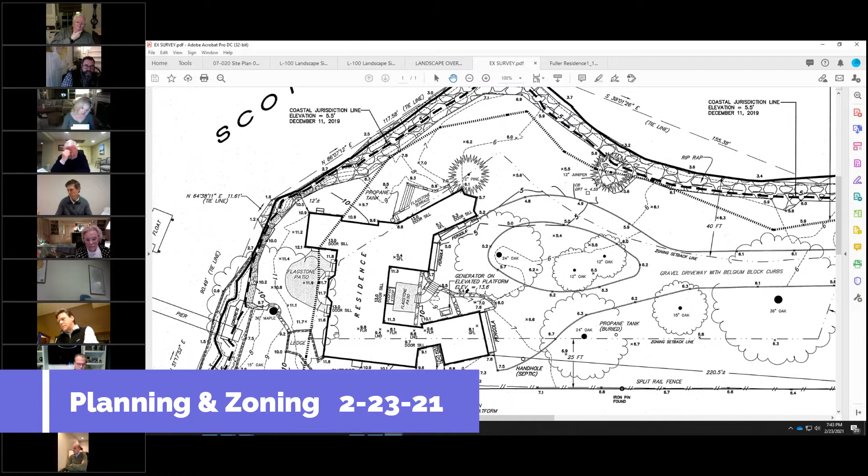Also, that sunroom that we talked about earlier is just 10.5 feet from what's defined as the rear yard, which should be a 40-foot setback. And that's where the property abuts Scott's Cove. Our lot is very attractive and bounded by Scott's Cove to the west and north. And because there's a little bulge, we actually feel like we do have some easterly views over Scott's Cove back toward Contentment Island Road.

The lower garages, which Danilo can point to in this plan, right there, right opposite the oval, flood frequently, and we'll show you some pictures of the flooding later on in the presentation. One of those garages was installed when the house was built. Another one was put adjacent to it in 1997 when there was a kitchen addition. The house was built in '54, and they actually graded the site down lower into that garage, and they built retaining walls up to get to the front door.

Danilo will point to them, but you can see several sets of steps which take a person from the driveway at elevation 5.5 all the way up to the house at elevation 13 over this front flagstone patio. We've actually lost two cars in those lower garages, and I no longer keep any cars there. The elevation of that garage floor is 5.4, and at Hurricane Sandy, as you all may remember, the elevation of the floodwaters was roughly elevation 11.

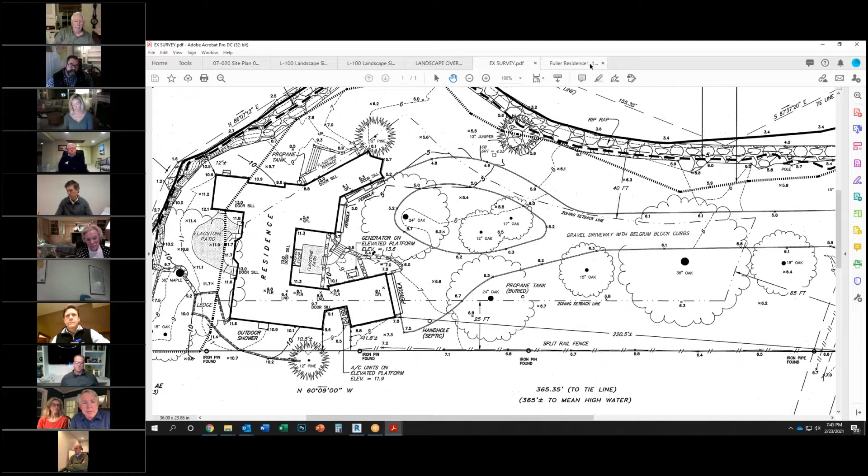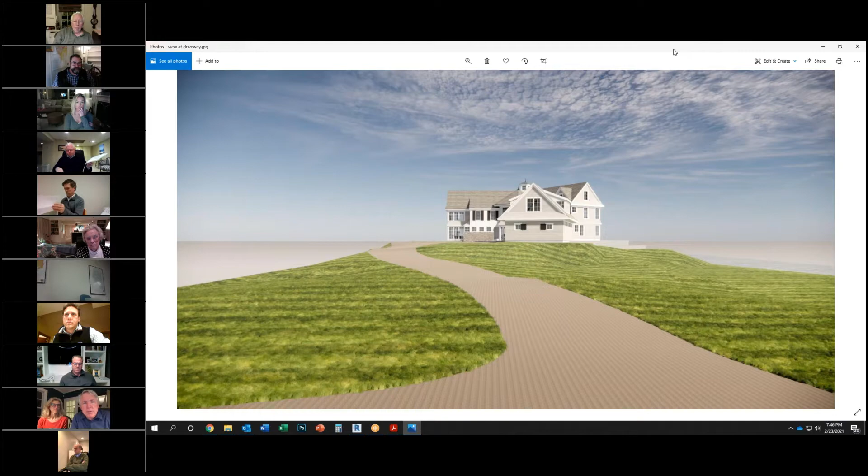While Danilo is looking, there it is. There, that's the view of the proposed house from Contentment Island Road. Danilo, do you have the one with the front door looking from the southeast toward the front door, showing the garages and everything? It's more representative of what the house looks like. That one right there. That's what the new house will look like.

Although this looks certainly more dramatic than our current house, this house is only 1 room deep. It's 20 feet deep. We've designed the house so that every room in the house has a water view and takes advantage of the water views. The house is 2 stories along the water to the west and to the north, and then there's an L that has the garage, which is only 1 story with the playroom over the garage that's built into the roof of the garage with dormers. So bringing the element down closer to the road, bringing a lower element into view.

The footprint of the new house, Danilo, do you mind showing the footprint of the new house versus the old house in that site plan, which shows the blueprint? So in blue here, if you could zoom in there, you can see in the blue is the footprint of the old house, and in red is the footprint of the new house. And interestingly, you can see we had to move the new house north and east in order to conform with the setbacks and in order to get out of the velocity zone, which was an important part of this design.

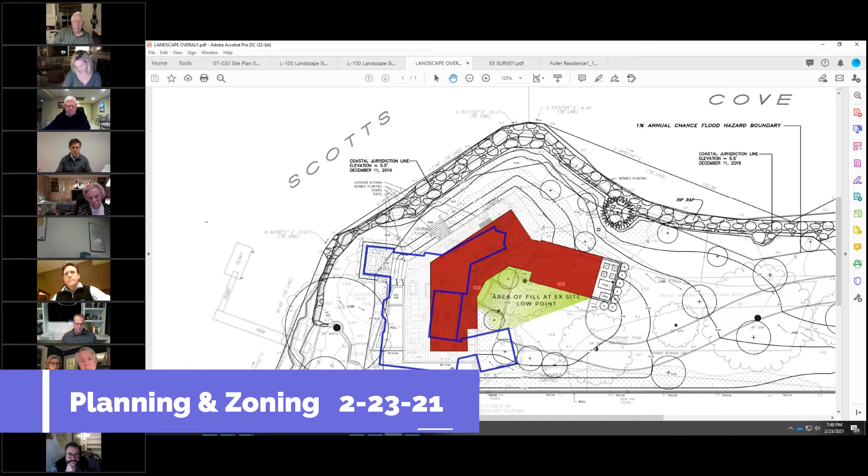The new plan will conform with the building height requirements. The height of that new home will be 27 feet above grade, and the regulation has a maximum of 30 feet. Just to give you a feel for the kind of conventional design of the house, it is designed as a sort of a beachy shingly house. There are only 9-foot ceilings on the first floor and 8.5-foot ceilings on the second floor, and a relatively conventional 12-12 pitch roof. And again, it's 27 feet tall versus the allowable 30.

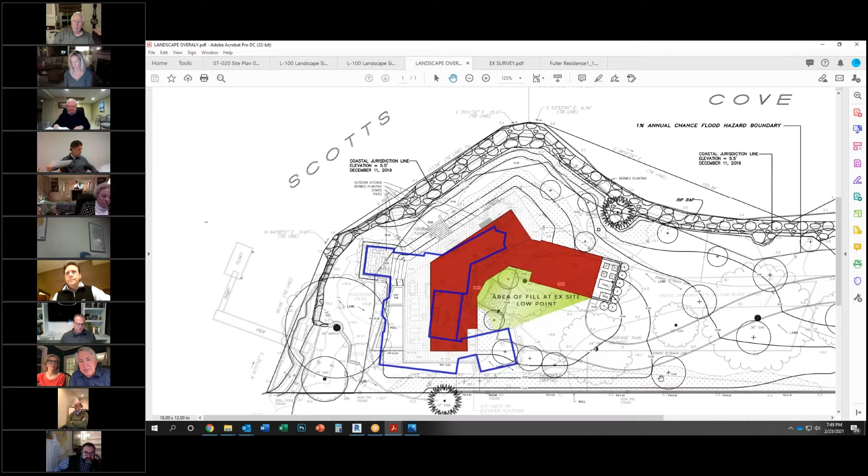All of the mechanical, HVAC, generator, pool equipment, and everything will be above the flood elevation. The house will be designed as a slab on grade, so that there will be no risk of flooding of a crawl space. No basement is allowed in the flood zone. And so we just won't have to worry about that anymore. And we bring the driveway up very gently at only 4 feet for every 100 feet of run. So that's a 4% grade change, which is very, very low. We bring the driveway up to elevation 15. So cars that happen to be parked outside the garage for visitors will be up above the flood elevation as well.

So I have another site plan. We'll show you some other photographs of what this site plan will look like later on in the presentation. The proposal is to fill the existing grade to raise the house above the flood elevation. As I said, the driveway slopes up just 4 feet for every 100 feet of run. The house is set back about 220 feet from the road, and we're rising up from elevation 6 to elevation 15.

The amount of fill is 5,400 yards. I know that sounds like a lot. It's not really. At 15 yards a truck, it's about 360 trips, or at 32 trucks a day, because we'll probably have a number of trucks running, that will be done in 12 business days. We would run the trucks for the fill during regular business hours, during the week when people are less likely to be home. We will, of course, have tracking pads, dust control, and street sweeping to the extent any debris does come off of trucks or any dust comes off of trucks.

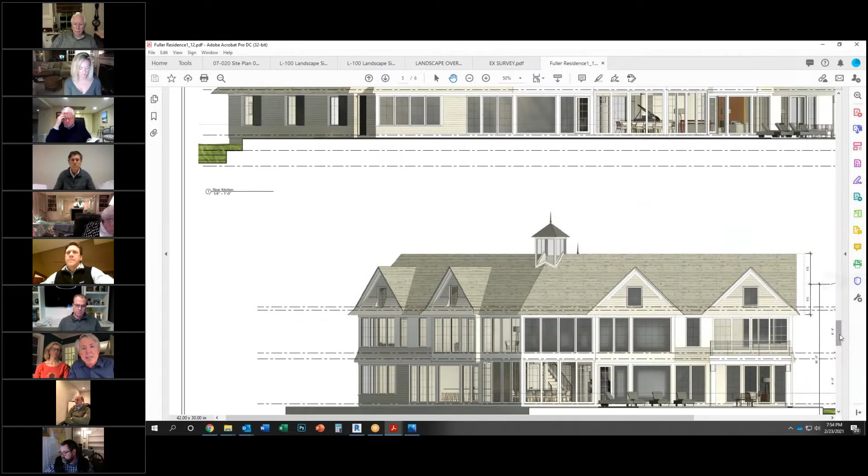So absent having a flat roof, and we can see this in section. If you zoom in on the part to the left, Danilo will show you this. You zoom right in, Danilo, so people can see the numbers there. If you look, the lower garage slab is at elevation 5.3. The existing average grade is 7'8".

What we're proposing is that the average grade be considered at 10, because we are going to fill in this area that was excavated for these lower garages, and we'll show where that is in the plan view. So that's roughly 2 feet 4 inches of fill. That makes the house conforming. As you can see, it's a relatively conventional house. And because the floodplain, which is AE 13, requires construction at elevation 14, we need to have a higher average grade.

And theoretically, we could have gone to the Zoning Board of Appeals and taken this decision out of the Planning and Zoning Commission's hands and said, look, because we're in this floodplain and we are required to fill so much to get out of the floodplain, would you allow us a variance because of this situation unique to this lot, on the definition of the height above existing grade? And since a subsequent decision by the Planning and Zoning Commission to allow the grading would render that decision unnecessary and moot, what we're proposing is that we consider this as if it was 2 phases.

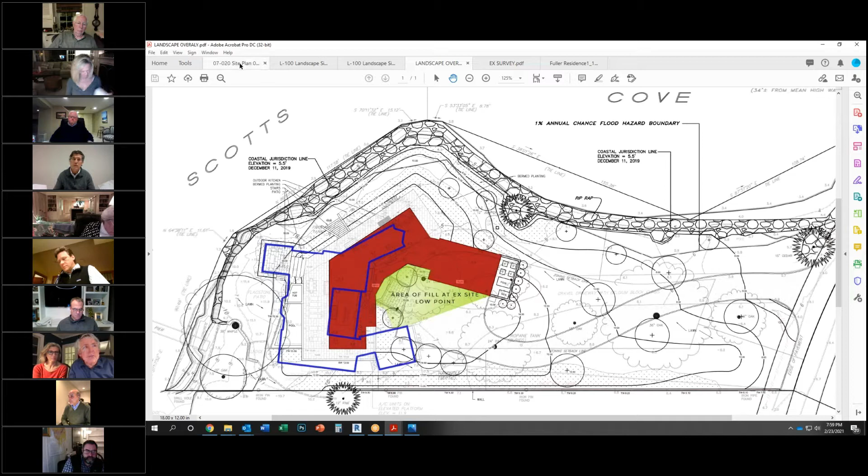We also are going to have no stormwater flowing onto their property. And in fact, we are containing all stormwater that comes down on our property and treating it. Currently, it is untreated and flows directly into the sound. We will be collecting all stormwater and infiltrating it into the ground. As ridiculous as that may seem, since we're right on the sound, that is a requirement in the regulations, and we are providing that infiltration, which is cleaning the stormwater and is a dramatic improvement from what currently exists today. So stormwater quality is improved, no flow to neighboring properties.

We're also upgrading our septic system, which is circa 1954. We're putting in a fully contemporary septic system. It is fully approved by the health department. And the nice thing about this property is it does have good percolation. So it's a net environmental positive from both a stormwater quality and from a septic management standpoint.

And also, it's a net improvement to the town's compliance with FEMA, which helps every townsperson's insurance and helps the town's FEMA rating. We're currently removing a structure that is fully non-conforming with FEMA in at least 2 different flood zone regulations and the velocity regulation. And we're taking the non-conformity and eliminating it, making it conforming.

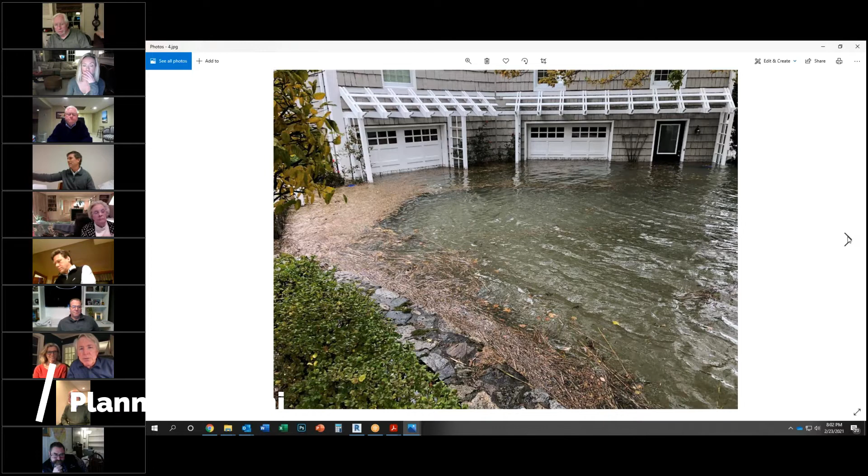Before I do that, Danilo has some photographs of the flooding of the lot, which I think is important to show everyone so people get a feel for what we're up against. Danilo, can you just slowly go through those pictures? I'll describe each one. This happens sometimes up to 3 times a year, sometimes more. We get some form of flooding. Flooding this extensive is a 2 to 3 times a year type thing. In Hurricane Sandy, these same garage doors had the water up to just under the windows.

Why don't you go to the next photo? And this is looking down the driveway across to Marian Castell's house. You can see that all of our trees are inundated, and Contentment Island Road is fully inundated. In Hurricane Sandy, our mailbox, which is at the end of the driveway just to the left there behind those crabapple trees, was fully submerged. Why don't you go to the next photo?

This is our upper garages, and you can see our neighbor's lot is fully flooded. Our upper garages are roughly at elevation 8, and you can see the water is right up to that upper garage level. Danilo, you can go to the next photo.

This is looking across to our upper garages. I wanted to show you this because these are the retaining walls that go up to the front door to the right side of this photograph. Again, this is looking east across, it's looking sort of southeast. Go ahead, Danilo.

This is at the bottom of the stairs in our kitchen, right behind where I'm sitting right now. When the tide goes out, I have it perfected down to 41 minutes with the garden hose to rinse all this water out, get the mud off the walls, tip the garbage cans back up, because I've gotten so used to having to do it. But obviously this is not an acceptable situation. Basically it substantially devalues the property.

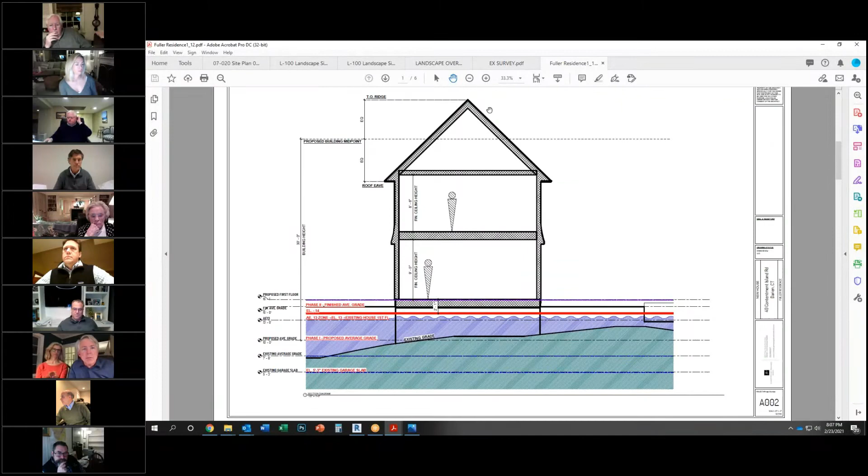That is correct. Danilo, can you go back to that cross section, please? That does a good job describing. Yeah, it's A002. Zoom back into there. So you see how the existing grade, that black line, slopes up. That part from the house down, because they excavated for that lower garage, you can see the lower garage is at the bottom line, elevation 5.3. We tried to show this schematically, but they excavated that down to get to those lower garages at elevation 5.3.

And so if you fill that back up, you can see how the proposed average grade, if you look to the right, definitely looks fair relative to the existing grade, the black line. Do you see what I'm saying? I got it. That's good. So if it did go back to ZBA, you would just say, hey, we want our credit for where it was prior to, whatever the year was, 1997 or so. Well, it's 1954 when that first lower garage was put in. They just added the second lower garage at the same level. I got you. Okay, understood.

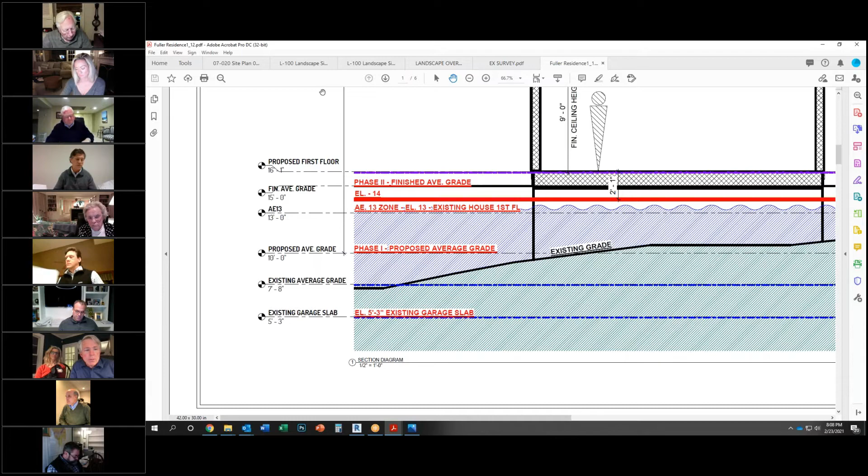That's right. I think the most important thing, and I'm not going to steal any of Doug DeVesta's thunder either, but if you could just make sure you explain to us all the drainage aspects, because we are changing the grade significantly. If you've designed it the way you usually design stuff, we don't have a problem. But if you can get everybody comfortable with that, I think that's going to answer a lot of questions. Okay. Thank you.

Give me the screen, Fred. There we go.

Okay. So up on the screen here is the overall site plan, a rendering of what it looks like. Again, we've got the existing house that Sam described. Around the outside, we've got patio areas. We've got a pool and a spa and a little patio area in the back here. And this is the driveway coming up to the property itself.

As Sam said, we are putting in a new septic system, replacing the old system that was built back in the 50s, with a new septic system that's current to the current codes, meets the current health code requirements, and is sized for a 6-bedroom design, which is approved by the health department.

We are providing channel drains on the edge of all the terraces. The terraces slope from the house towards the edge of the patios or terraces, to be collected in a channel drain and then into our recharger systems or Cultec systems. We're handling the first inch of runoff, which is the requirement for being down along the coast here.

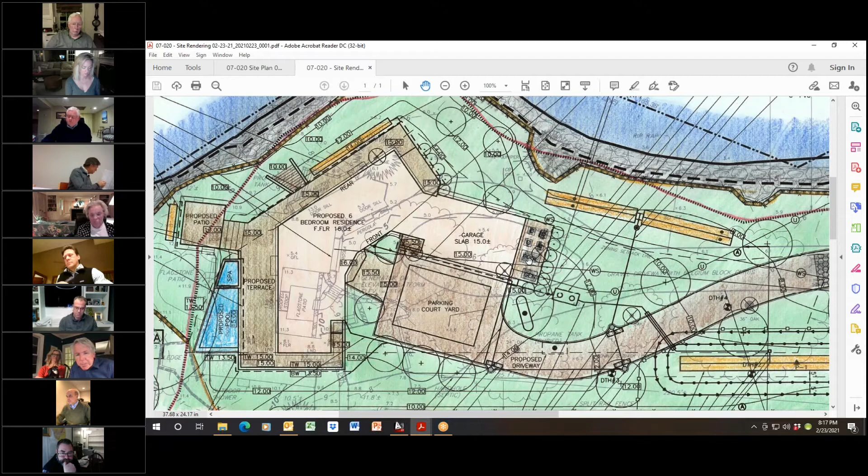I just want to clarify something for the record, because on the chart there, you say that you have a gravel driveway with Belgian block curbs. So I just want to confirm that that's an error. That must be an error. The existing driveway is gravel with Belgian block curbs. So maybe, where are you reading that? Because that may be... Literally on the document we're looking at right now.

Yeah. Right there. That's the existing driveway. That's in light gray. Right. This is the new driveway. That's from the survey. They use the survey as the background. I see it now. Yep, I see it now. Got it. Okay. Too many lines. No, this is a busy plan, but it's got a lot of good info on it for sure. Yeah, it really does. It does. It looks very good. Thank you.

Jen, not Jen, Kara, ladies. Just Kara, you want to go first? No.

I think this is a really complex and interesting design and plan. And I have to say, your presentation was just very transparent and forthcoming, and I appreciated the transparency and just putting it all out there, and it's a tough location and plan. And my mother was in Sandy on Long Island, so the flooding really was pretty striking to me. And that's a problem that has to be addressed. So I appreciate the thoughtful and very transparent and honest presentation. Well, thank you. Jim, Rand?

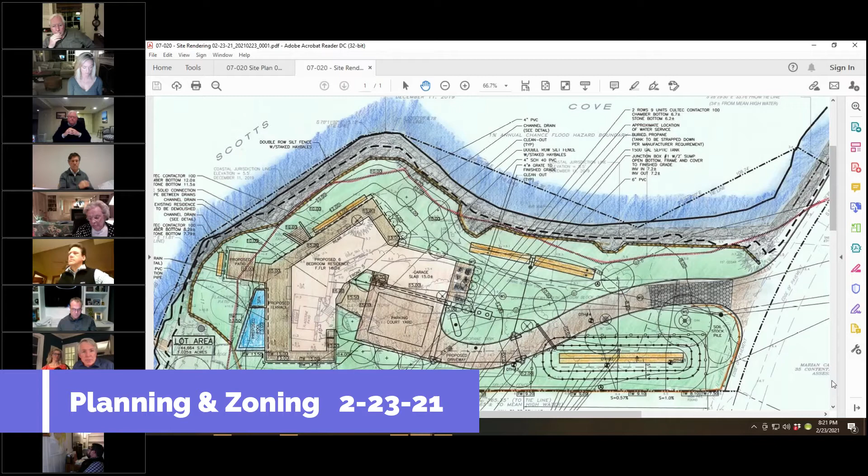And also, we're building a relatively modest house, so the overall construction period of the whole house is relatively modest. And finally, this is the solution for this lot, so it's not really optional. This is really the only way we can solve this lot, other than just leaving things the way they are.

All right, thanks. I wasn't criticizing the project. I'm just thinking about the logistics of getting it all done. But if you and the owners of the road or roads involved are copacetic, I certainly don't propose to comment any further. Yeah, it's a little bit of a private road issue, and then he needs to get the private road people to sign off.

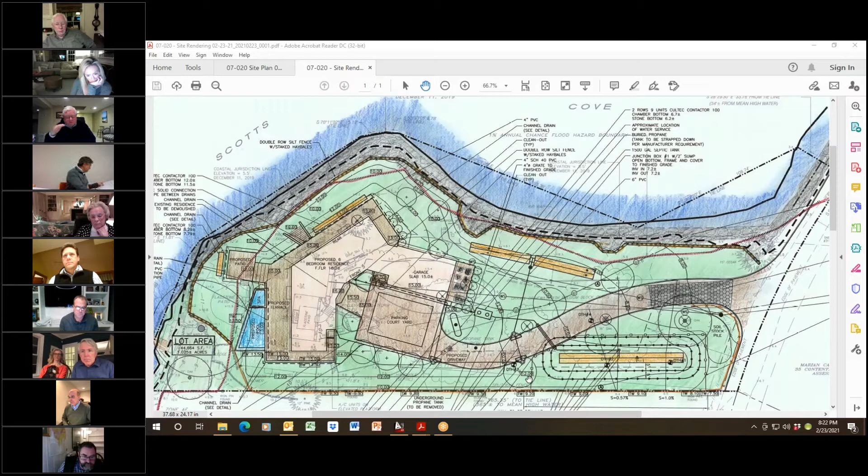George, any comments? A quick question, if I can. I think I missed the answer to this in Doug's presentation, but I'm looking at the southerly boundary, and I'm seeing an elevation of 12 closer toward the house, and then 10 at the property line. So why is there not flow from 12 to 10 on the southerly line and then potentially into the neighbor?

So Doug did answer that. There is a natural native fieldstone wall. We're going to do it with what we call potatoes, big stone along the edge of the wall. There'll be roughly a two foot wall along that edge, and the wall will extend slightly above the grade. The grade will pitch down to it, and there'll be a swale with a collection pipe that then discharges to the west to keep any flow off our neighbor's property.

So there'll be one collection point along that southerly boundary? Imagine it as a French drain. There'll be gravel on top of a perforated pipe, then discharging west. Okay, good. I was sure you covered it, but I'm sorry I missed it. Thanks. No problem. That's fine. I think we got all the commissioners.

I understand what you're doing. Steve, there's one thing. Marian has asked that I ask the commission for permission to remove that 12-inch juniper on the north edge of our property along the water. We showed it as remaining in place. It's right there, Doug's circling it.

That improves the view, not only Marian's view, but anybody traveling north on Contentment Island Road. I think it's a nice thing to do for the neighbors. It is along the edge of the water, and we were trying to be sensitive environmentally. But I don't think it would harm the environment if we remove the tree, and it would make my neighbor Marian happy, and that's always a goal, to make our neighbors happy.

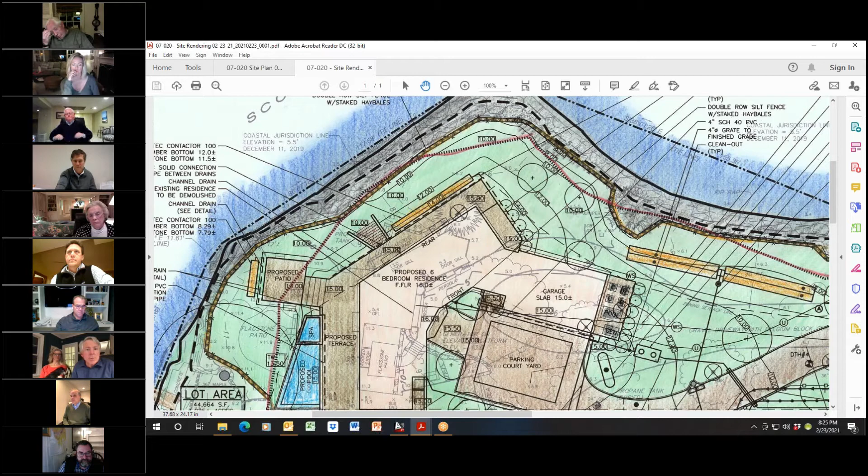Yes, Danilo, if you go back to that photo from the east, I can point to that tree. It's quite a bushy juniper, but I know junipers. I grew up on, like, trust me. I used to play with those. Danilo will find it. No, I know.

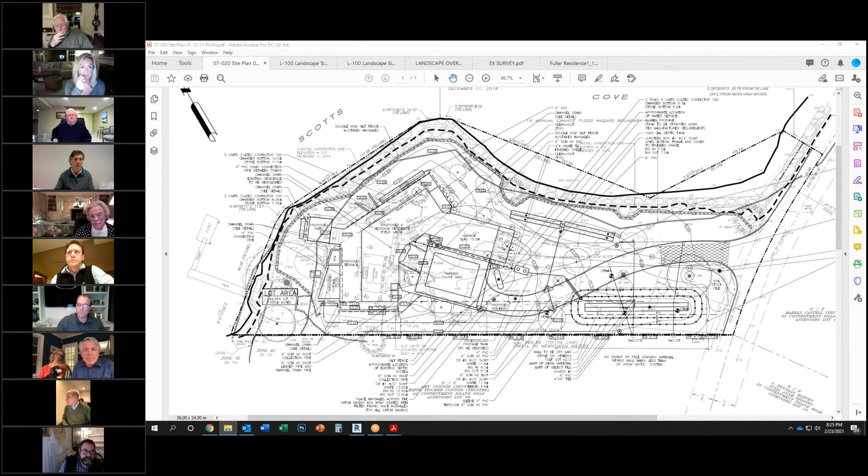Yeah, I'm okay. Do you want to see the tree, Kara, or do you care? If they have a picture of it, I would. Yeah, I just don't see how big it is. No, it's one to the left, and that's it right there. There it is, right there. Oh yeah. That's the neighbor's Christmas tree. Yeah, it's kind of a big, fat, long-limbed jobber, but happy to our neighbors. Yeah.

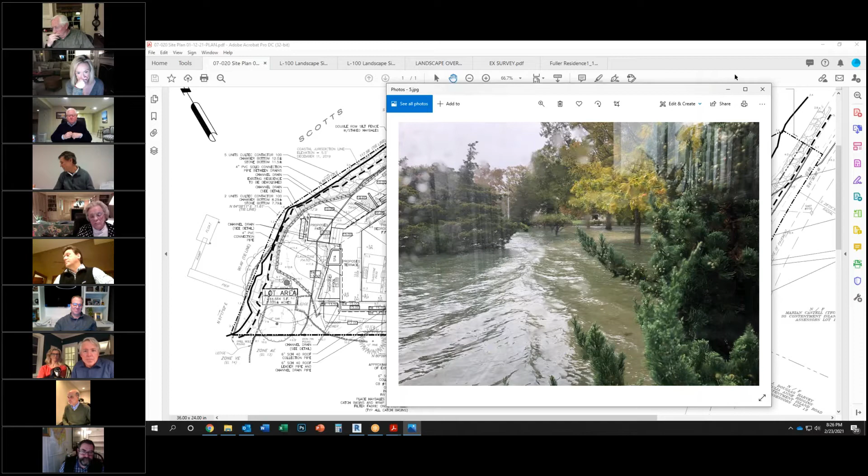Okay, thank you. There's a tree that's depicted on your landscaping plan, Fred. I mean, I'm sorry, Sam. It's depicted as staying rather than being removed. So yeah, that's fine. It's just we're not going to hold you to that on the record. Okay. All right. I think we got all the commissioners.

And can I open up to the public? Right? Okay. Would anybody in the public like to speak to this application? And just for the record, Mrs. Castell, I know you're here. I see you there. Thank you. We did receive your email this morning, and it already is in the record that you sent to Jeremy Ginsburg. So we don't have to read that again. But anyone like to speak to this application, please unmute yourself or raise your hand, and Fred will recognize you. I think we're good. Okay.

And let me say one other thing, two other items. We did receive, and Jeremy and Fred, you guys are doing a great job with this back and forth between Darren Oustafine and the engineers, because he sends a letter, then Doug DiVesta responds to everything. Just for the record, Darren Oustafine sent in an email Thursday, February 12th, upon a review of Doug DiVesta's civil engineering information. Everything is already noted as satisfactory, and Mr. Oustafine signed off on it.

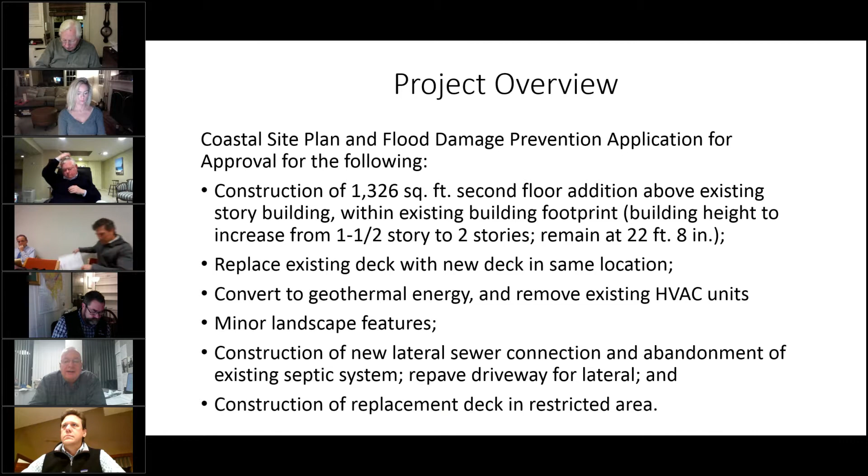And part of the project involves construction of a lateral sewer connection. There's a main sewer line in 5 Mile River Road, and this property is not connected yet. And that'll be part of the project. And I'll talk about this replacement deck in the restricted area when I get to the maps.

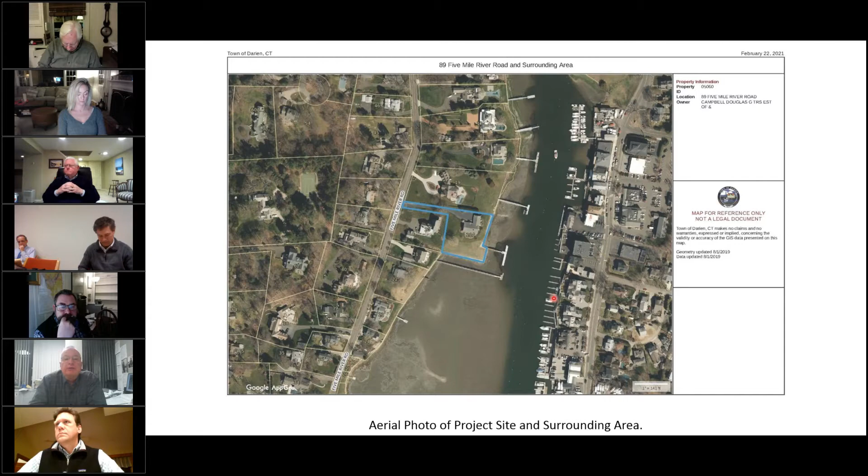I just put these aerial photographs in here. This is the site right in the center here, outlined in the blue line. To the west is Darien, 5 Mile River Road, and the residential areas over there. And then you look across the river and it's Rowayton Avenue with slips and docks and commercial buildings right up against the shoreline with very little, if any, landscaping.

The next photograph is a close-up. You can see this site is entirely developed. Driveway coming off 5 Mile River Road to this rear lot. The entire lot is either driveway surface, lawn, or building. There is some additional landscaping along the house, a couple of trees and some bushes along the seawall. The existing zoning location survey, I'm going to try to zoom in on this. Here we go.

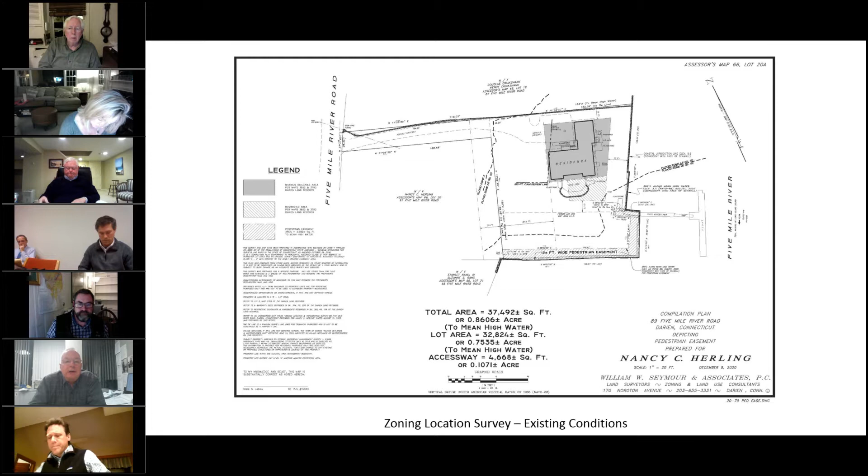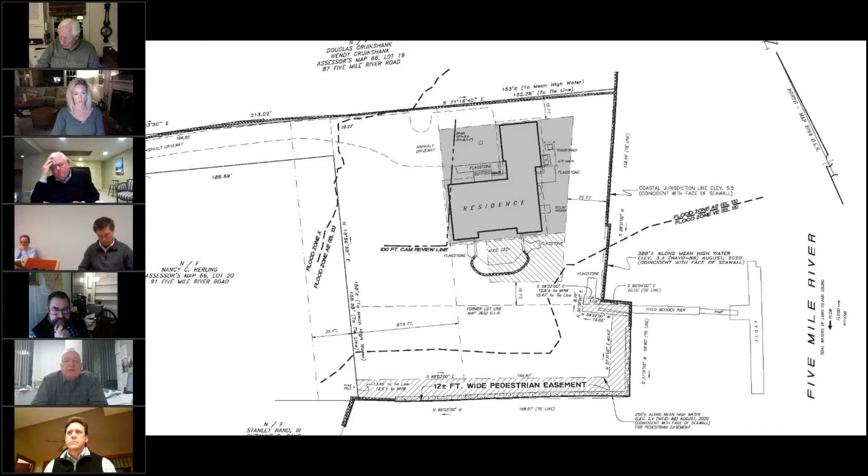All right. This is the existing footprint, the existing deck. This little crosshatched area is something that started out as a restricted area for the benefit of number 91 5 Mile River Road, and it was intended to protect a view over to the east. In 1995, the commission approved the construction of a deck, which basically, in light of the restrictive covenant, rendered what's left of the restrictive covenant now pretty much obsolete because it no longer serves its originally intended purpose. Our plan is to just replace the deck.

The next slide is, I'll also blow this up. The proposed conditions, this gray area is just nothing more than the building footprint in light of setbacks along the north and along the seawall, and along here was that original kind of restricted area.

There's another restricted area between the house on 89 and the house on 91 for the benefit of number 87 5 Mile River Road, which is up here. That restricted area is not going to be affected by this project. The only work that's being proposed there is to abandon the septic system, connect the sewer, and repave the driveway, which is not constructing a building or not in any way impairing that restricted area.

There's an existing dock off the east end in the river. Recently, a shared dock agreement was entered into between the Herlings and the current owner of the lot at number 91, so that there's now a pedestrian easement that runs along here over to the dock, and they split the use of the dock.

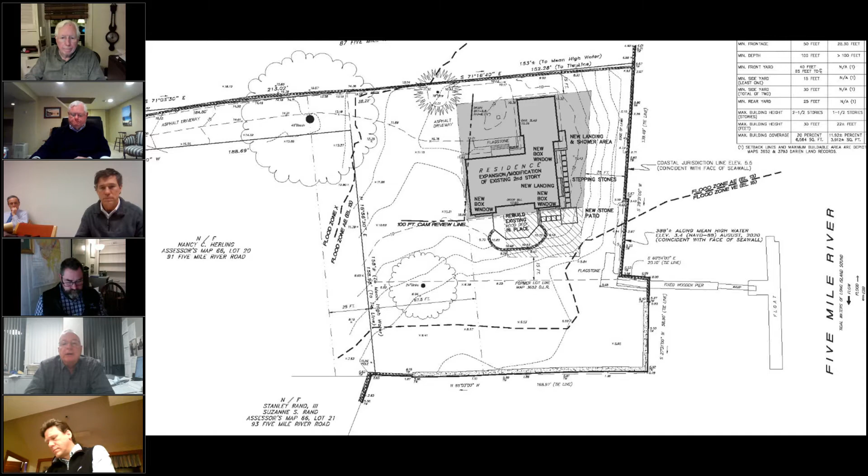The surface elevations here, roughly 10 feet along the western part of the buildable area, and it slopes down to about 5 feet in the eastern area along the seawall. The river actually makes a turn here and comes up. You'll see in a photograph that the water comes right up to the seawall here. So this property is bounded on two sides by 5 Mile River.

Photo tour. This is a photograph looking from the south, looking basically as if you were looking upstream, but through the house. The deck and this little retaining wall planted area is shown in the foreground, and obviously the existing house in the background. And then we start moving around. This is the dock that we saw on the survey, and you'll see there's a seawall that you can begin to see behind the dock. You'll see this slope going down from west to east with a couple of trees and some bushes along the house.

This is the westerly wall of the house, as if you're looking from the common boundary with 91, 5 Mile River Road, looking toward the house. The garage is over toward the left side of the photograph. It's a little dark, but that's the way the lighting was when the picture was taken. This is the garage. Main entrance is over here to the center of the picture. And you'll see the existing asphalt driveway.

Now this is looking out downstream. This long dock belongs to the Rands, who are next door. It's Mr. and, well, unfortunately, the late Sandy Rand and his wife, I think, is still there. But you see the property is an existing lawn with some trees and a bush over here to the left along the house. This is from that south corner. This is the Rand dock, and we're again looking downstream.

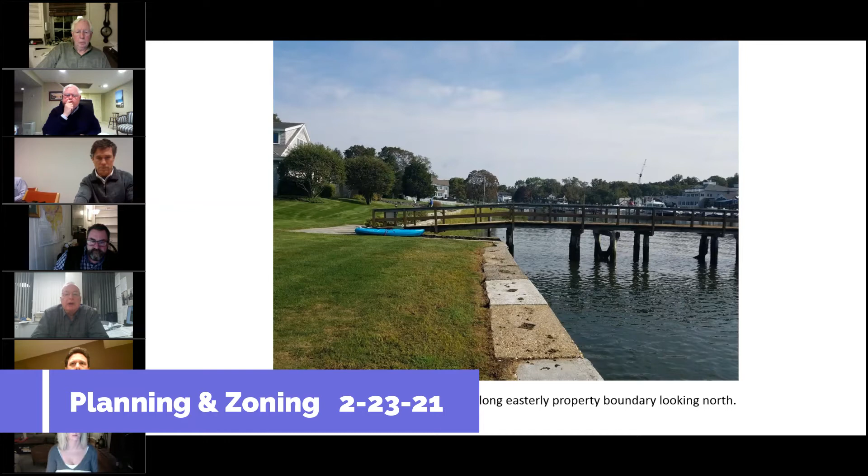This seawall runs east and west. The Rand house is here. Number 91 is back over here, and you'll see a lawn right up to the seawall. This is looking upstream, similar configuration, existing seawall, lawn right up to the seawall. And then this is from the dock looking at the northerly part of the seawall.

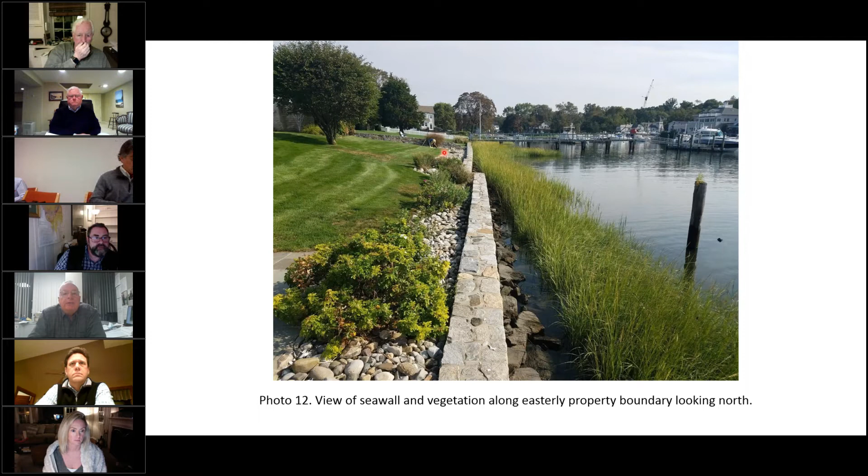Tidal grass is growing seaward of the seawall, and you have some bushes along in here in this gravel area inside the seawall. These bushes will be kept here. They're going to be, I guess, beefed up. I'll show you what it looks like on the other side. This is at the northern end of the property looking back, and those same bushes are going to spring up along this section of the gravel area.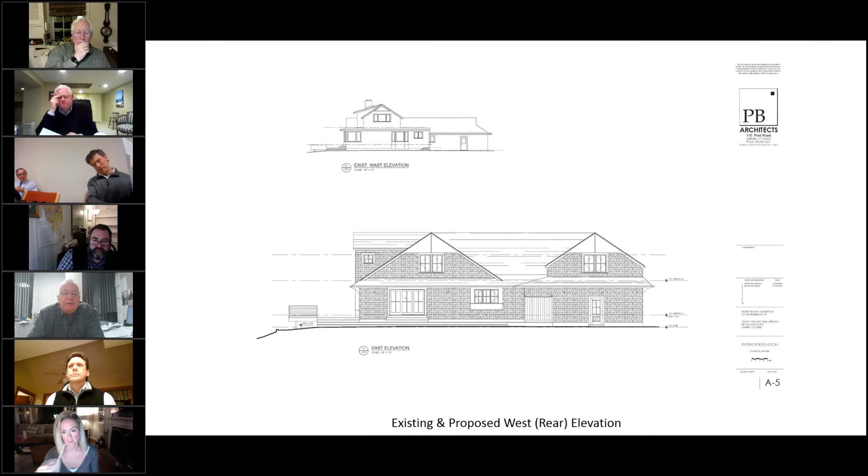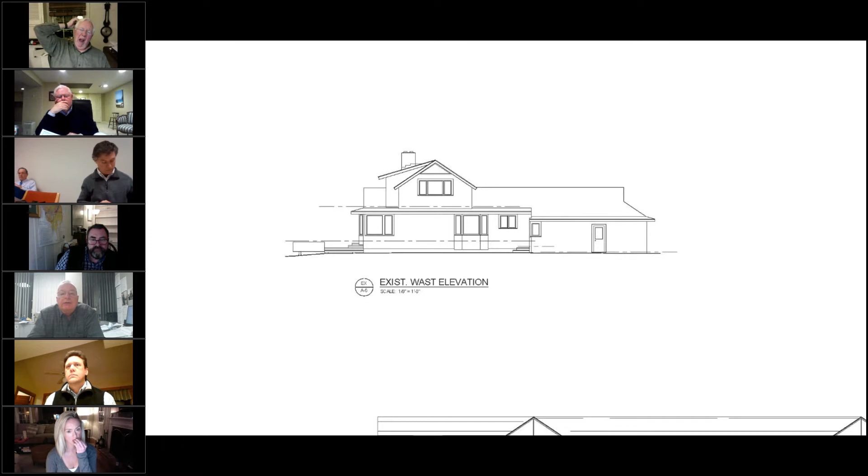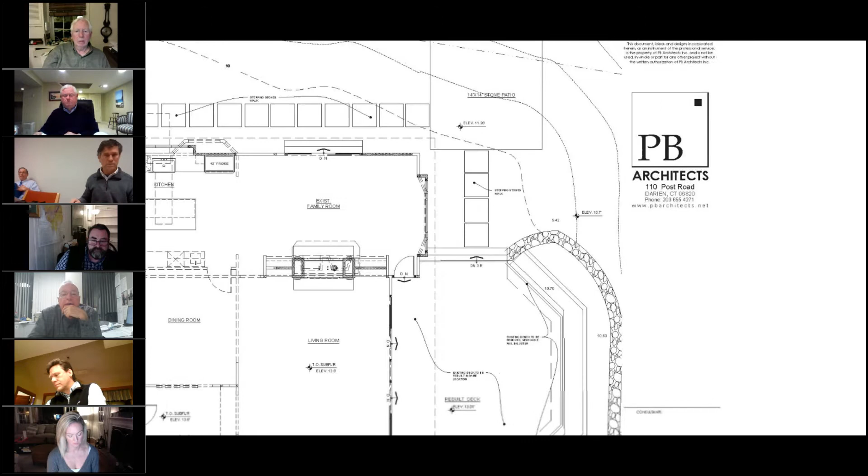I have floor plans. Yasa can go through those if you like, but this is a good plan to show you some of the outside features. Starting over here with the new deck. These are just flagstone steps to a new stone patio, and then steps along the rear of the house to another. This is like a kind of a step-up area with an outdoor shower, a landing outside the door.

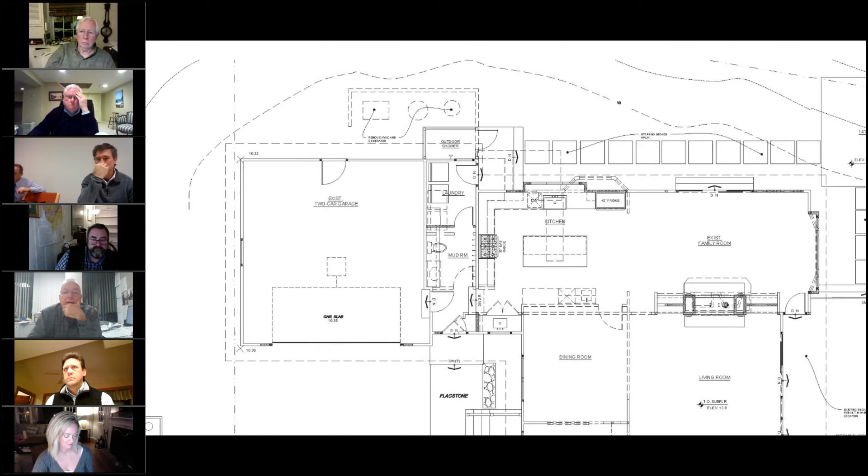This is going to be removed because we're going to geothermal, and the mechanical and air handlers are all going to be up in the attic, I believe. And Yasi can correct me if I'm incorrect. All right. And those are the floor plans. And then I have comments here. We did receive the letter from the 5 Mile River Commission. It's a page and a half.

Having read it, I think the only real question they had was about landscaping. I've shown you photographs of the landscaping. It's going to be increased a bit, but it's well landscaped today, and it'll be kept up through this project. Again, there's no earthwork going on along the water because this is an addition to the second floor of an existing house without any expansion in the footprint. DPW and Darren's comments, there's no change in the building or driveway area or the impervious areas. As I mentioned, there's a 0.1% reduction in building coverage, and that's because the equipment is being removed.

I guess we have to ask for a waiver under Section 888 because we're not adding 1,000 square feet of impervious. The impervious is going to remain the same, and we're on the water, so there's really no need for stormwater management. And then, of course, we'll provide an as-built survey. The Herlings already have an elevation certificate, and I don't believe that would change as a result of this project because elevation certificates focus on the lowest floor elevation, and there won't be any change there. The health department, Jeremy mentioned, and certifying a proper abandonment of a septic system is typical. No material comments from WestCOG. I don't think Jeremy received any response at all from DEP.

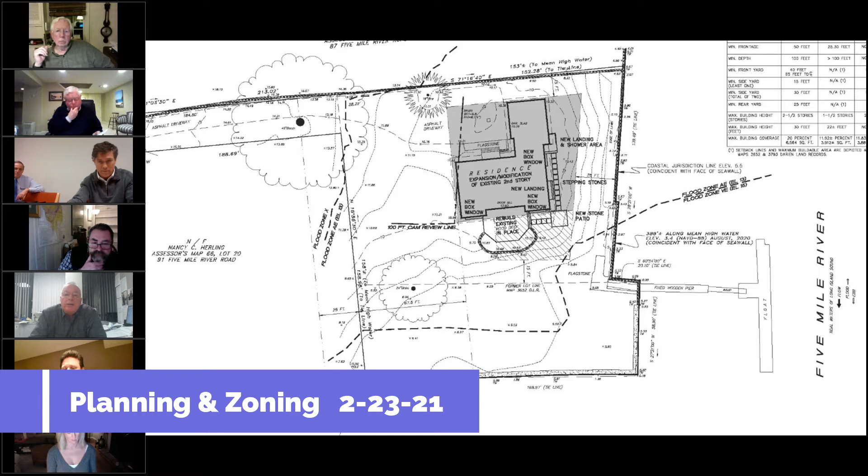Okay, there is a V zone, VE, I think it's elevation 15, that runs up to this broken line, comes onto the property, goes around the corner, and then comes up a few feet into the lawn area. But the existing house deck and all of the other work is outside of the V area. Once you get past the V area, it's AE elevation 13 for basically the rest of the buildable part of the property. Once you get up here to this line, you go to flood zone X, which is not a hazard zone.

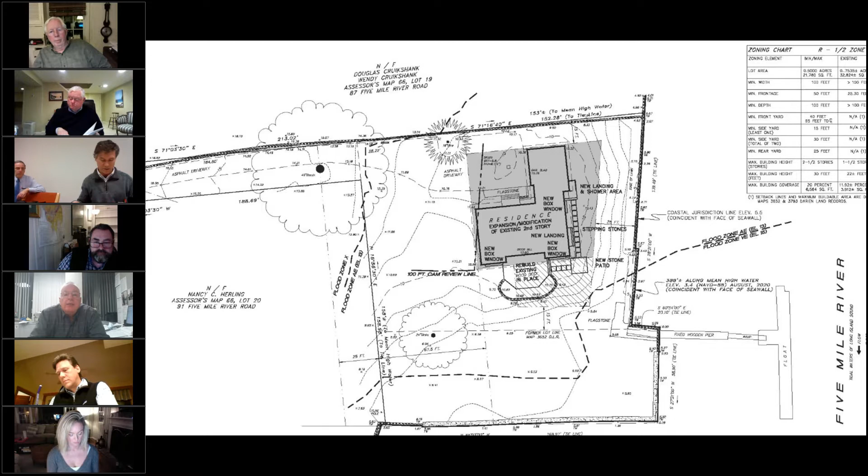The new construction is all second floor. It's way above the base flood elevation. And the existing elevation, as I understand it, is above 13. It's about 13.7, depending on which sill elevation you look at on the survey. It's not the entire 1 foot, but at least it's over the base flood elevation itself. So that covers the flood zones. And

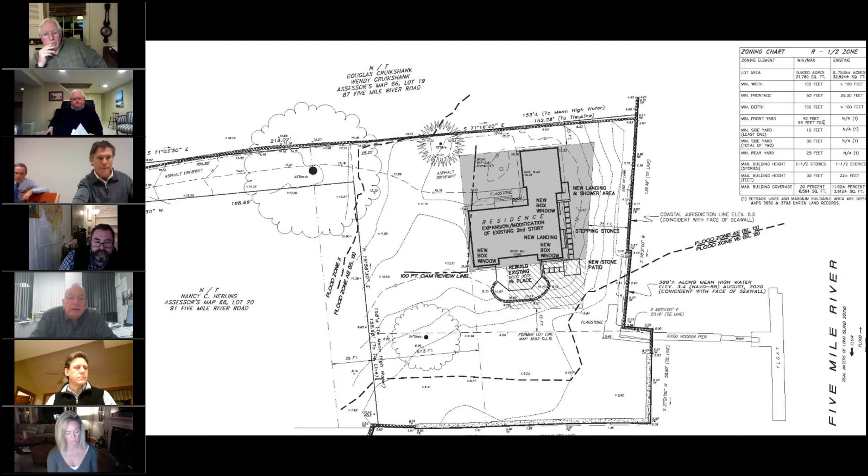Well, let me see. Are you looking at Yasik's floor plan, A3? Are you looking at this? No, it's Yasik's A3. Yes, in your packet you call it A16. Oh, I see it. It's a cross-section of the flood zone. Got it. Hold on, I missed your reference.

It's your reference. I like your references, man. I'm giving you a compliment. Yeah, I know, but when I put them onto the PowerPoint, the A references go away.

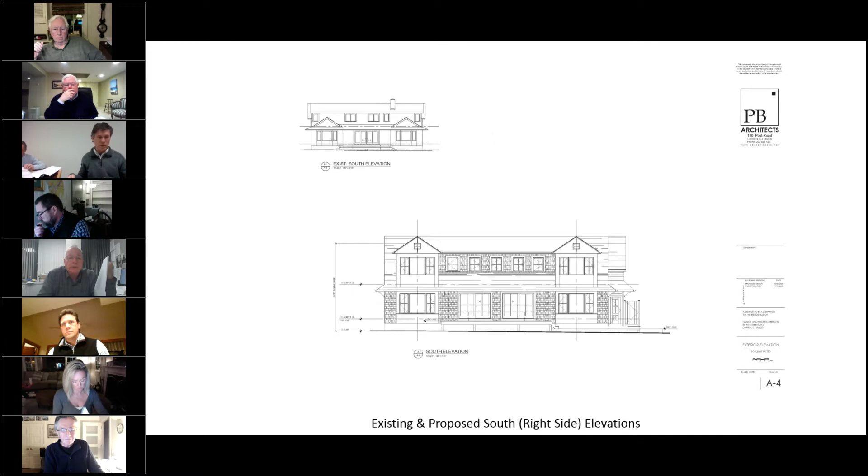So the whole house is in a flood zone. Hold on. We lifted 15 houses. Okay, it's this one. It's this one. Correct. Now it was just A3. The architect calls it A3. Yep. My little blue thing in the middle of the bottom of the page is A16. You're correct, you're spot on. Okay, and your question? The whole house, you're in the flood zone. Correct. The bottom of the house is in the flood zone.

So my question is relative to what we did in the Noroton Bay. If you're doing a significant addition, don't you have to lift it out of the flood zone to satisfy FEMA? Only if you exceed 50%. Right? And you've done the calculation, Bob? Yes, the tax assessor field card shows a market value of the house, just the house, at $1,137,120. And Yasik is here.

Wait. How much is the land? It's house only. You're saying a 1.5 story house is assessed at $1 million. What's the implied market? No, he calls it market value. So it's $1,370,000. Got it. And of the $1,370,000, what's the house? What's the dirt? It's $1,137,000 for the house. Okay.

And Yasik has the numbers for the cost of the work. And what did Yasik say is the cost of putting a whole second story on that house? Yasik, $411,000. Hold on. How much? Bring up the estimate. Oh, okay, go ahead. I couldn't hear what he said.

We have to scrutinize hundreds of applications, but they just looked at the flood applications. So certainly when they come in and audit us, they will look at projects like this one and the other one you just saw, and they want elevation certificates. We did not always require them, but what FEMA threatened to do is pull the flood program from the town of Darien if we don't require them. So even though Bob is saying we don't need one because we're not changing the first floor, I think the commission should require one, because if not, I will be in this room with FEMA for hours explaining why it wasn't required. And I'm not going to say because Bob Maslin didn't want one. Well, that's not going to be a legitimate answer for FEMA.

Exactly. And does that impact other neighbors adversely, or the town, if the town is viewed as not requiring things that FEMA expects? In terms of the insurance issue, if we're not a town that's considered compliant, does that impact other people's ability to obtain insurance in flood zones? That may not be the answer, but in a case like this, FEMA will ask us, they're getting close to the 50% number, why didn't you make them lift the house and bring everything up to code? And our response was because they didn't hit 50%. So they will ask for the backup information, the cost estimates, etc.

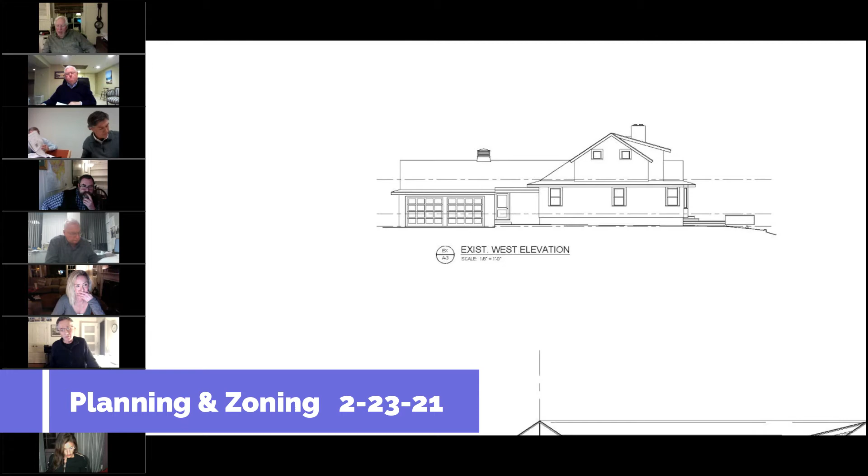Correct. That's a mudroom between the garage and the first floor. There is a step. That area is actually a step down, where it's existing. It's basically a mudroom there. If you look at the plan, Bob, if you can move to the plan, it will explain what's going on there.

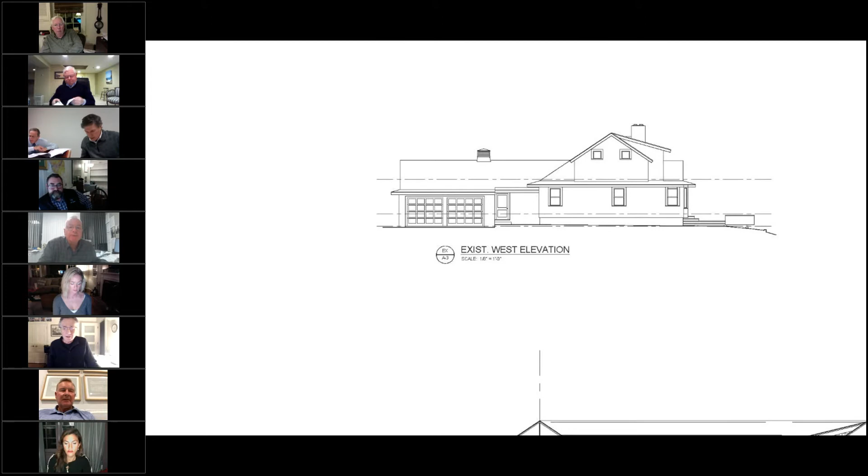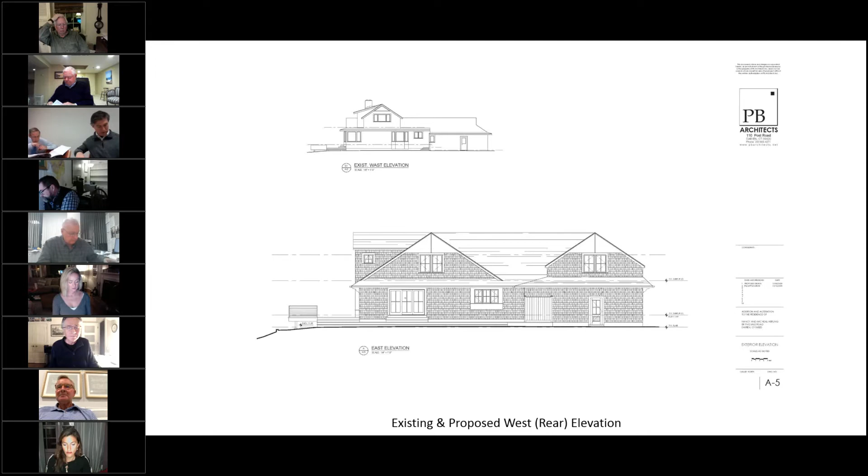Bob's in the wrong page. I can't control the screen. Which page are you looking for? Look at Yasik's PB Architects A3, exterior elevation. Try this. That's A5. I'd rather have A3 if you have A3. A4, A3, there's three, bingo. Zoom in tight if you can on the left-hand side of the screen.

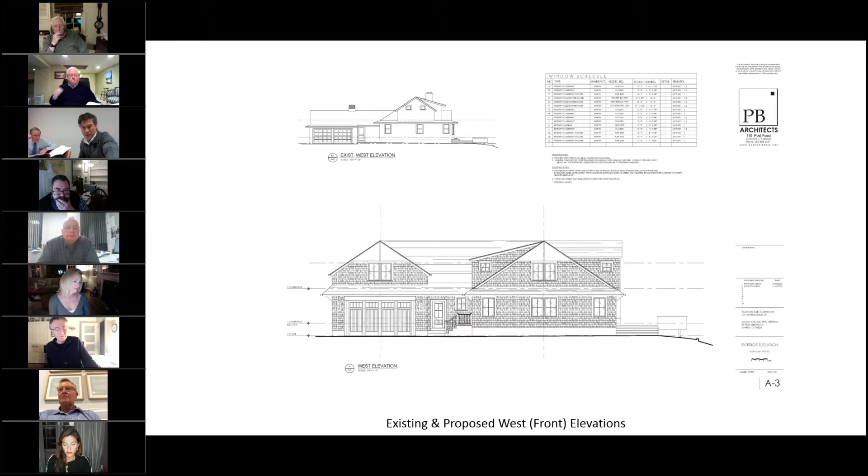Shift it over a little bit to the staircase going into the kitchen. On the left-hand side of the screen, you can see where it says top of subfloor, 13.6. That dotted line that he's got there, and no offense, Yasik's not a surveyor, goes right through that upper staircase.

So to satisfy Darien's regulation, which is 14 feet, and the flood vents and the flood elevation, we just have to make sure the thing complies. We're talking about four tenths of a foot. Bob, let Yasik explain it. It's his plan.

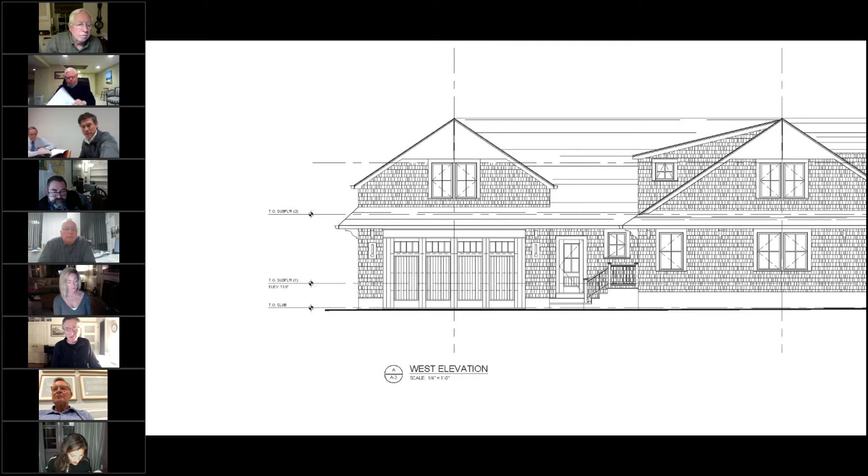Okay, let's go to the first floor plan. We're not changing that. That's an existing condition right there. That's a mudroom that connects the garage to the house. If you look at the floor plan, you will see that, again, we're not touching this. This is an existing condition right there.

There is part of the house which connects between the garage and the first floor, which is, I guess, a connector, and it's at a lower elevation than the rest of the house. The first floor is at elevation 13.6. Okay, so which is that window? See that little staircase there? Top of the staircase, there's a window right there.

Is that a kitchen or a bedroom? What's behind that window? Again, a little red dot on the window, please, Bob. Would you want to go to the first floor plan? Okay, I just wanted the window. Do you want me to help here? This is Mike Herling. Okay, sure.

It's your house. So you see those steps? What's your question? We're just trying to make sure it complies. So if you're coming from the garage, if you're looking at the door, well, now I can't tell what you're looking at. Okay, here's the main entrance right here. So the doorway to the west of that is a doorway that walks into the mudroom.

Yes. That is at a lower elevation. I understand that, yes. Right? You step up 2 steps into the rest of the house, which is the kitchen. Correct. And that elevation is 13.6. It's marked on the plan. If you look at the entry foyer, the living room, that's all at the same elevation, 13.6.

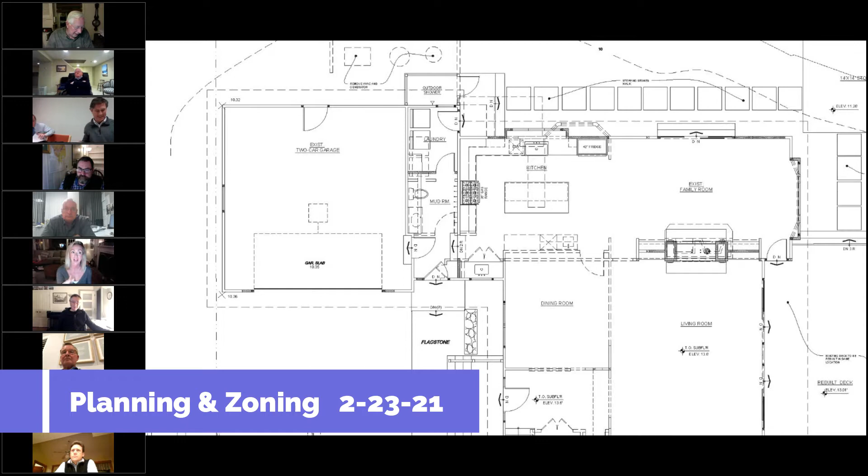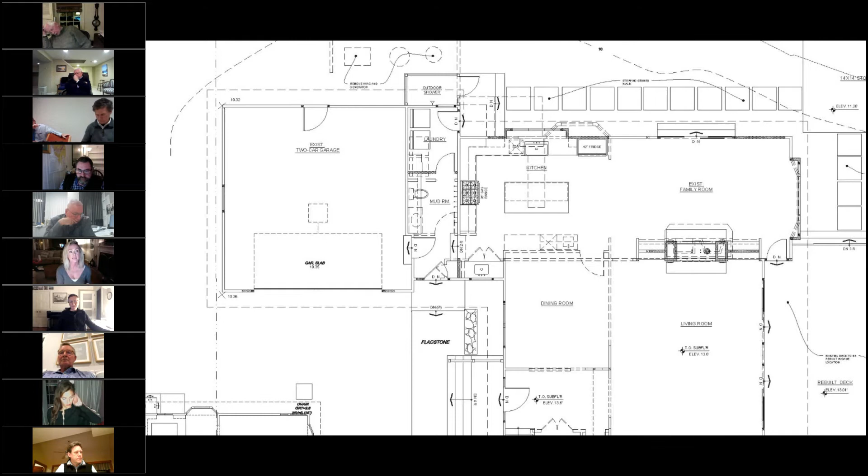Kara? Yeah, but Steve, you and I are from Long Island, and I think Steve and I know a lot of areas where these issues are not taken seriously, and non-compliance leads to tremendous problems. And so I'm glad the applicant has spoken about that, that he's concerned about it and understands the importance of these issues. And I really do appreciate that. It's more than just the property owner that can potentially be affected. Blighted homes, things do happen to areas and towns when these issues are not taken seriously.

And we have more than a zoning responsibility. We have a planning responsibility and preservation of coastal resources, and these issues are part of our remit. So I appreciate the applicant and Bob and everybody addressing these concerns, because I think they are important. We do. Believe me, we're waterfront property owners. Here and up in Block Island as well, and we've had to deal with coastal area management issues there. We've toed the line in every respect with any work we've done on our property up there.

I think there's some people on the commission who know me. They know that I've been a lawyer in the community for 40 years. I take my legal and ethical responsibilities very seriously, and I don't push boundaries, so I'm not going to push boundaries here. No, I'm just stressing the issue. That's all.

I just have a question. At the 50% mark, it's amazing that you're able to stay within that, just as someone who's in the industry and has also done renovation on our own house. So that number seems interesting, but why didn't you decide to elevate the house? I guess that's where I'm confused.

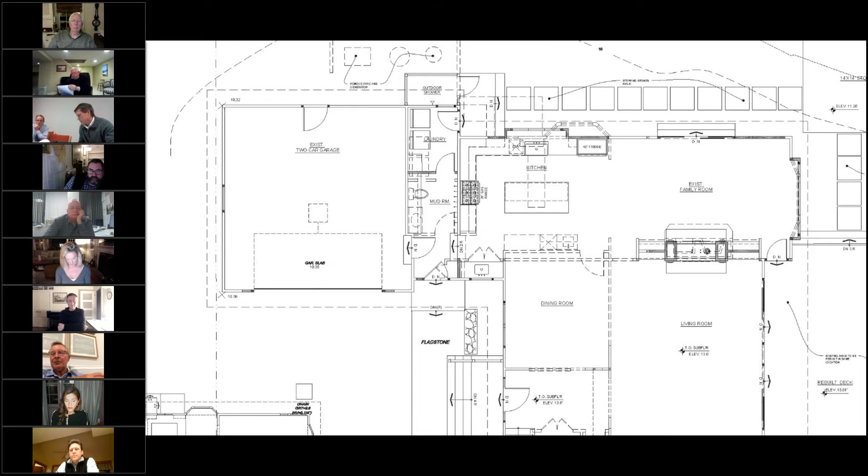We do not have a landscape plan, I understand that. We haven't hired a landscape architect, but if you look at the pictures that Bob showed you, we will be working with our neighbors directly to the west, the Murrays, on landscape planning for the overall property. The idea would be to plant things that are naturally occurring on a property that's adjacent to salt water.

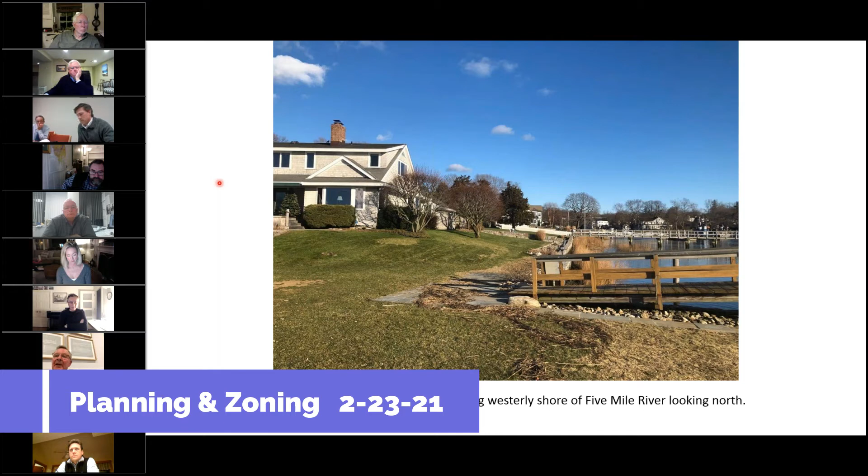So along the eastern portion of the property, between the house and the river, you see there's rocks behind the seawall. There's some Rosa rugosa that is planted there. Our intention is to plant naturally occurring seagrasses and Rosa rugosa in that area, which will substantially improve or mediate any runoff from the property beyond what's already occurring. There is about a 3-foot boundary inside the seawall, a sort of rock bed where the Rosa rugosa is planted. That will be planted out in a similar fashion.

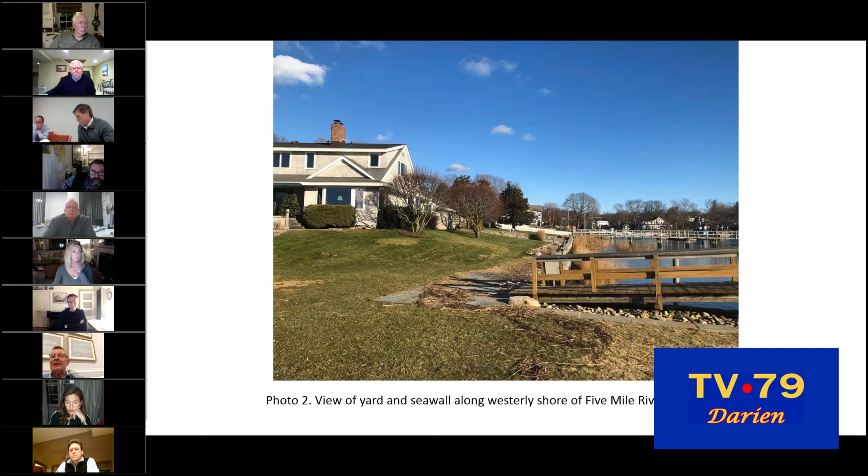Right, that's exactly what the 5 Mile River Commission is asking you to do, but we don't have a plan for that, we just have your testimony now. We need to answer their question, and then give you a waiver of 880 if you're going to do it. We are going to do it. Yeah. Okay. So then we need a plan. We need a condition. Come up with a condition of approval. All right.

We'll do it. Then we'll put that as a condition of approval. One thing we can do, this is not a complicated planning that we're talking about. No, it's not. It's simple. We're making it harder than it needs to be. So we would just plan out that. You do $100,000 in landscaping, then you got an issue. What? If you're doing a lot of landscaping, it's expensive, then you butt up against the 50% rule again. That doesn't count. It's work on the building that counts to the 50%, not the landscape. But in any regard, we're not going to do $100,000 of landscaping.

This is not expensive. The Rosa rugosa, this is what we did up at Block Island on our property there. You plant this along the shoreline. It's a very resilient plant that deals well with saltwater conditions. So we will plant that out in that area along with some naturally occurring seagrasses. Beautiful. And that would be very inexpensive, I can guarantee you. We can get an estimate on that if you want, but that doesn't apply to the 50% in any regard. So that's fine. What we're gonna end up doing, the concept is something like that will be in the resolution that gets drafted if this thing is voted for approval.

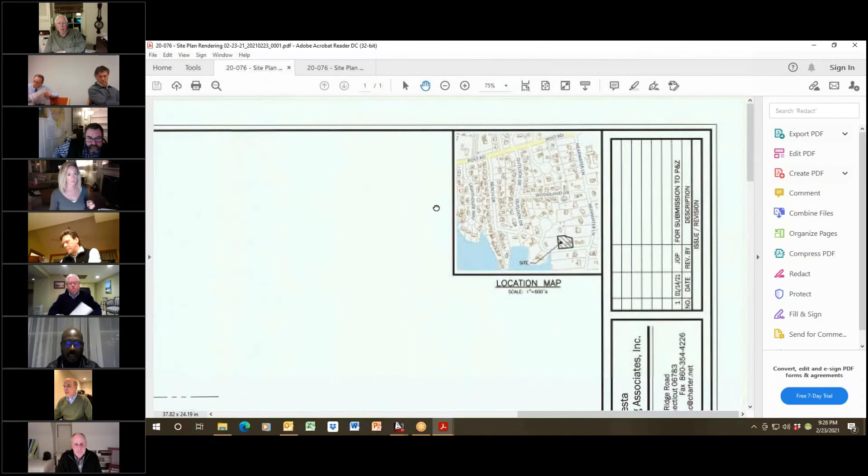If you take a look at the location map, what you see here is our site. Here is the outline of Holly Pond. So we're very close to Holly Pond. So we're looking at just 1 inch of runoff, quality versus quantity of runoff.

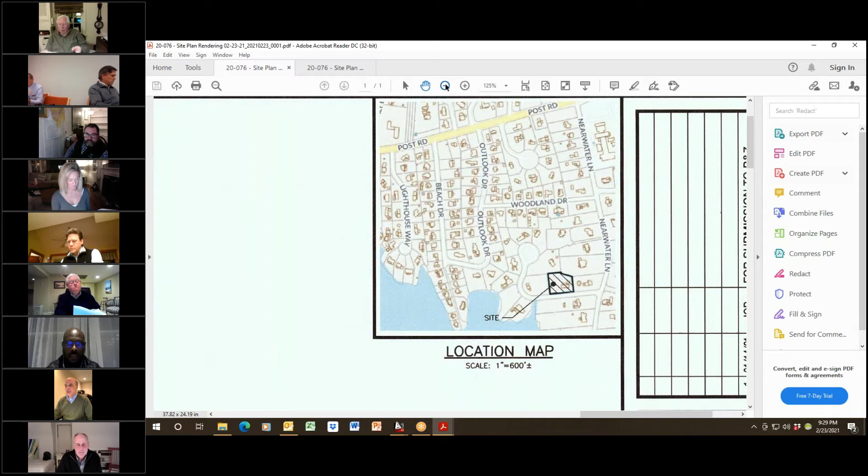We are going to have a bathroom in the pool house, and that will be connected to the main house through a grinder pump. That will be connected into the house itself, into the sanitary sewer, and then into the existing E/One grinder pump and out into the street. And same thing with the water service going into the property itself.

Thanks for that. I'm just looking at the pool house plans that I have. Is there like a kitchen, or you said there's a bathroom inside here? I don't have the floor plans of this proposed. Mark Andre, who is the architect, is on this call as well. He can go through the architectural plans. Mark, do you have the plans out or no? You can just say yes or no. Actually, I don't have the plans with me. Sorry.

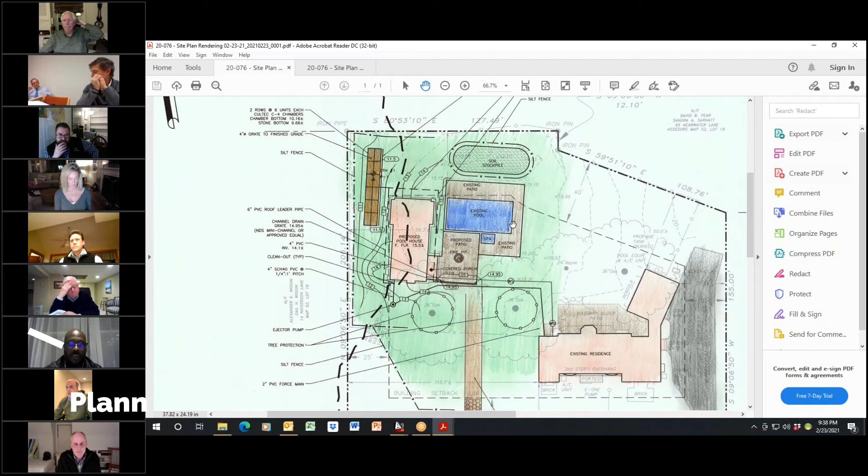For the record, Doug DeVesta. The property does slope from a high point of elevation 20 on the north and east corner of the property, sloping in a westerly direction towards Mr. Wiggins' property there. Currently, there is no drainage on the existing patio, and that all drains in that westerly direction. Now, the pool house will be placed between the pool and the property line, so that runoff will be collected, as well as this proposed patio area, and then brought into a drainage system that we're proposing on the north and west corner of the property there.

When we dug some test holes in that area, we found the soils to be decent, with a good percolation rate. I think Mr. Wiggins did see us out there doing those test holes a few months ago. So we are providing drainage to collect that runoff in that area there. Now, the pipe that he's talking about, I'm not sure, he's saying it's in the northwest corner, which would be in this corner in here. We didn't hit any pipes. I didn't visually see any pipes in that area. Maybe it's an underground pipe or something.

I know Darren did mention something in his comment letter about a drain pipe or a sewer pipe in that area. Let's see, what number was that? Number 14, the quote "old soldier home sewer pipe." If that's found, we have to abandon it and plug it up according to Darren, and probably bring him out there. I'm not sure of any other drainage pipes out in that area, but again, we are collecting the runoff from our new impervious areas and detaining that on site.

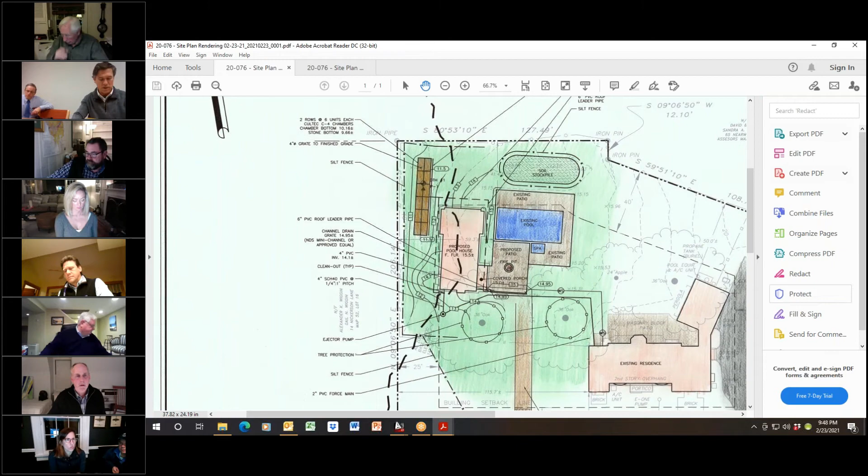All right, next item on the agenda, land filling regrading application number 494, Jeffrey and Rebecca Morrison, 13 Prospect Avenue, proposal to raise and renovate a portion of the existing residence and construct additions to the structure, including a new covered front porch, and perform related site development activities, including filling and regrading of the front yard and installation of stormwater management. The 0.494 plus or minus acre subject property is on the south side of Prospect Avenue, approximately 550 feet east of its intersection with Mansfield Avenue, and is shown on Assessor's Map number 16 as lot number 75 in the R1/3 zone. Jeremy, what do we got?

This is a simple addition to an existing house on Prospect Avenue. The addition is mostly in the back of the house. They are putting in proposed underground detention in the backyard. And as part of this application, there's a little bit of grading between the front of the house and the street. And due to the location of that grading, within 15 feet of the property line, it's before the commission. The grading is minimal. Harry Rocheville from McCord Engineering is here to describe it.

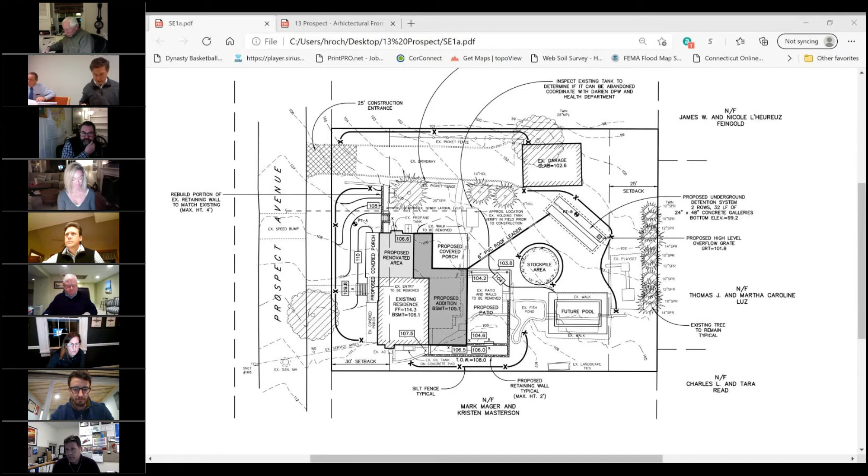Next item on the agenda, land filling and regrading application number 496, Kenneth and Karla Coe at 281 Hollow Tree Ridge Road. Proposal to construct a new single-family dwelling on a now vacant lot, install a pool, terraces, a new driveway and parking court, installation of stormwater management, and perform related site development activities. The 1.32 plus or minus acre property is on the west side of Hollow Tree Ridge Road, approximately 100 feet south of its intersection with Haskell Lane, and is shown on assessor's map number 26 as lot 52 in the R1 zone. Evan, what do we got?

This is a proposed new two-story dwelling on a now vacant lot. Professional engineer Craig Flaherty is here to talk about how they designed the grading and drainage to meet the stormwater management regulations. There's wetlands all the way on the west side of the property as you go further downhill. Just before you go on, Craig, for the record, this application was also referred to the EPC. The EPC said it was not significant enough to hold a vote, but they requested an approval from staff. So EPC already looked at this and signed off. Is that right? That's right, I can talk to that. Great. Craig Flaherty, the floor is yours, sir.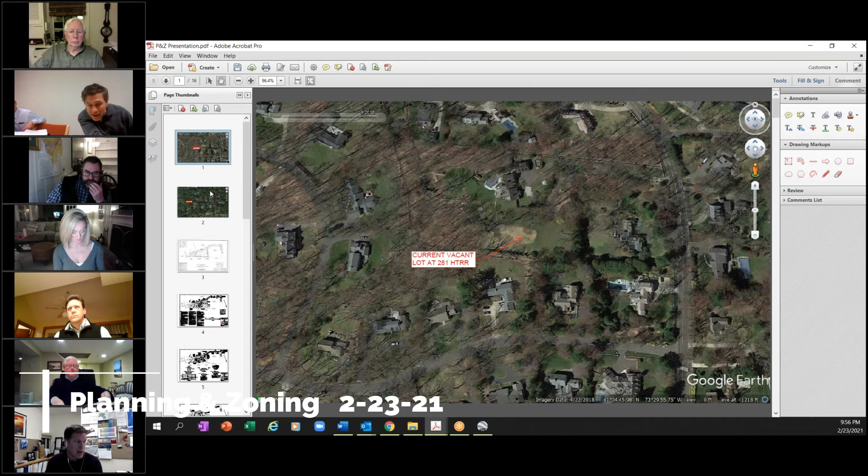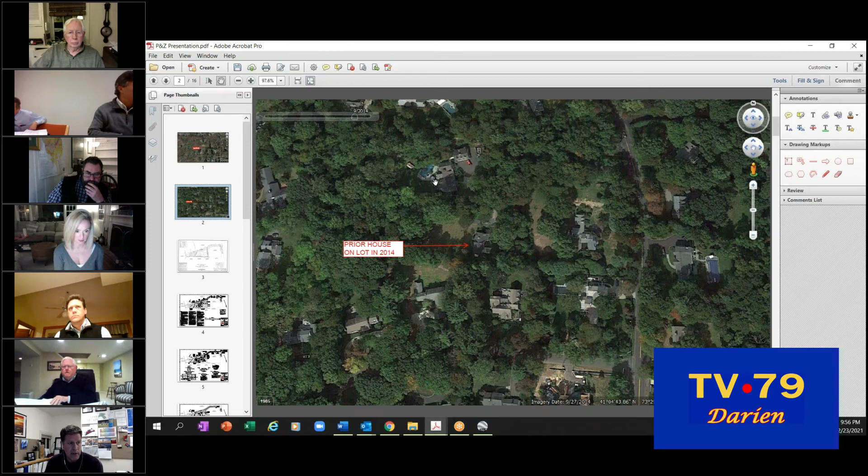They had purchased the property and knocked down a house that used to be here on 281. So I've switched from this aerial, which is a photo from 2018, to this aerial, which is a photo from 2014, to show you that there was a house on this lot previously. It was knocked down by this individual so they could enjoy some more privacy. This house also at the time shared a driveway with 283 Hollow Tree Ridge Road.

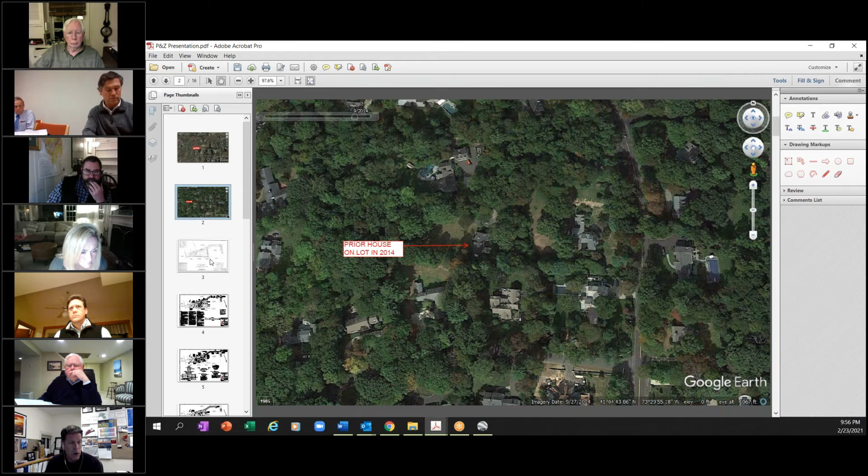In 2019, the mapping of these three lots was revised, and subsequently all three lots have now been resold to new owners. So this is the new shape of 281 Hollow Tree Ridge Road. Again, it's oriented in the same way. You can see the flag or access way stem that comes in from Hollow Tree Ridge Road. This is now separate and distinct from its original shared drive with 283 Hollow Tree Ridge Road. If you happen to go by the site, there's a gravel drive roughed in right now to provide access to the property.

The land on the property generally slopes from south to north. So water is going up the screen as it flows over and off the property. That's for probably the access way and the east half of the lot. On the west half of the lot, as was mentioned, there is a wetland edge right about there. And there is a water course that runs through the westernmost tip of the lot right about there. So the land on the back half of the lot kind of slopes towards the wetland and towards the water course. The water course flows off the property like so.

So we are proposing a footing drain discharge that extends into the EPC's regulated area. It's the 50-foot upland review area, but not into the wetlands. So we did need to file an application with EPC. They heard that application at the beginning of the month, decided it did not require a public hearing, and it received a generally favorable review, but I think they're going to vote on a specific document at their meeting next week. So that's the existing condition.

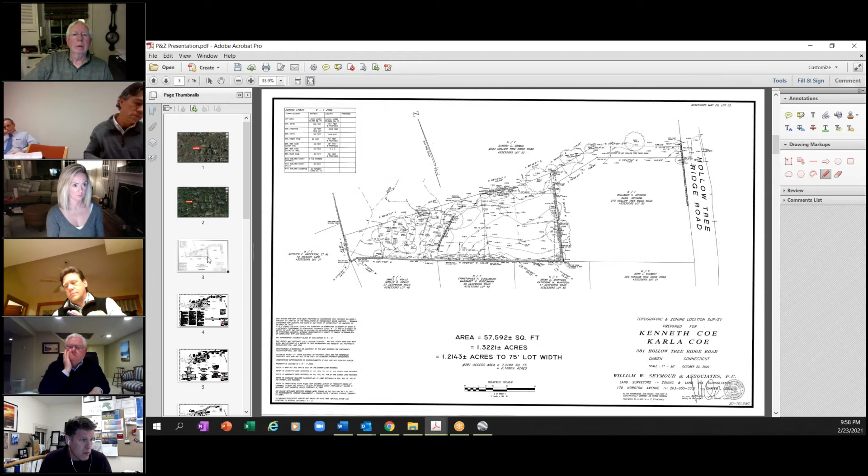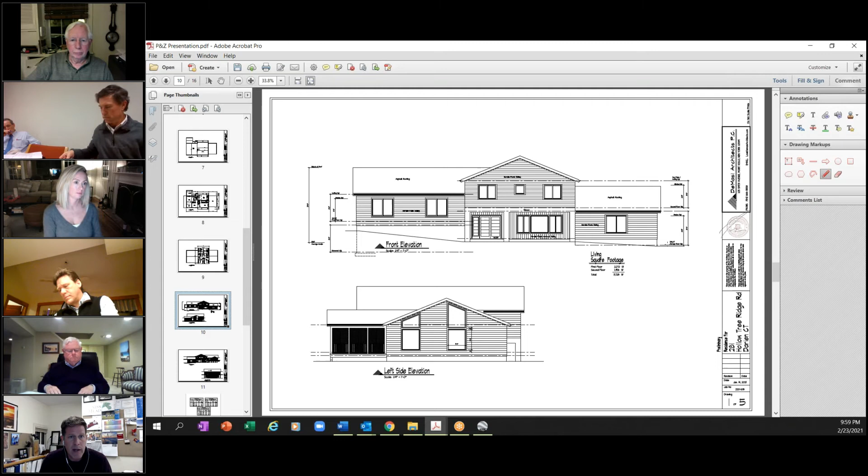This is the proposed site plan. I think I might just show you the house plans before I do the site plan. Not terribly relevant, but I think it is constructive. This is the front of the house. It's designed to be a split level house. The part you see on the right here is a 2-car garage accessed from the north side. And this is slab on grade, no basement, no crawl. The part in the middle is 2 stories with 3 bedrooms above, 1 bedroom which will largely be used as an office below, and this section just has a crawl space.

The section that's farthest south on the site is the main living space, the living dining area. Again, this is a split level, so you're a half level up from the entrance and then a half level up to the 2nd story. And this section will have a full basement, but it's shallow because it's under the high section of the house. Again, garage, 2-story section, 1-story section over a mechanical and storage basement. So how that looks when we come to the site plan, you see the new driveway coming in from Hollow Tree Ridge Road. You see the house site here, which I will now zoom in on.

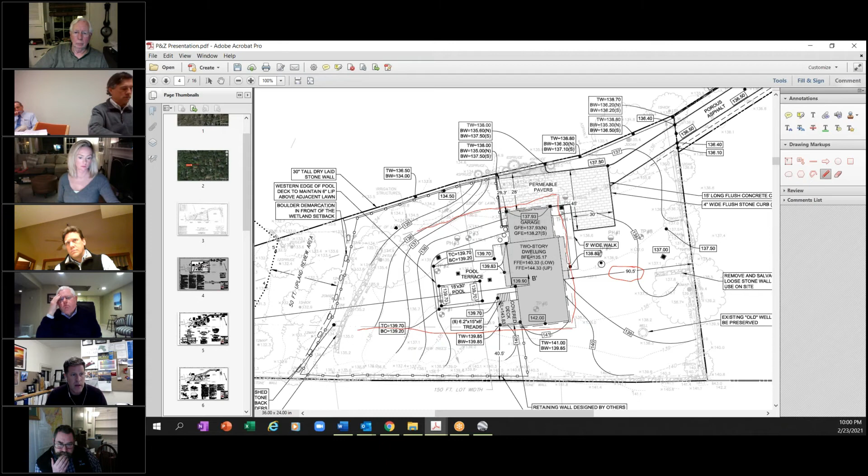So as I mentioned, there's no disturbance in the 50-foot upland review area other than a footing drain discharge, which discharges here outside of the wetlands. And so all of the work on site is in the upland areas. Since it's a rear lot, it's got some unique setbacks. I'm generally tracing the zoning setback line now. So it's actually a 90-foot setback required because it's behind another lot. So we generally place the front of the house up against that 90-foot setback. It's got a 40-foot setback here to the southerly property line. That's a rear yard setback based on the way your regulations are defined.

So again, here you see the garage is on the north side of the house. This is where the 2-car entrance will be. The entire driveway stem is going to be porous asphalt over a crushed stone reservoir. The driveway court up near the house is going to be made of permeable pavers, again, over a crushed stone reservoir. That crushed stone reservoir is able to collect the water that comes through those 2 porous and permeable surfaces. And that helps us meet not only our water quality retention requirements, but it also helps us comply fully with Section 880.

We've taken no credit for the prior development on the lot. The existing conditions drainage analysis is as you see the site today, which is just lawn and trees. And so the mitigation that we're proposing in our stormwater management plan fully mitigates the proposed hardscape back to that lawn condition.

So let me just jump over quickly to the drainage plan. I talked about the crushed stone reservoir under the stem driveway. I talked about the crushed stone reservoir under the permeable paver drive court. There is also a small infiltration system in the rear yard, which collects some roof leaders from the house and drains from the pool terrace. Those are our stormwater mitigation devices.

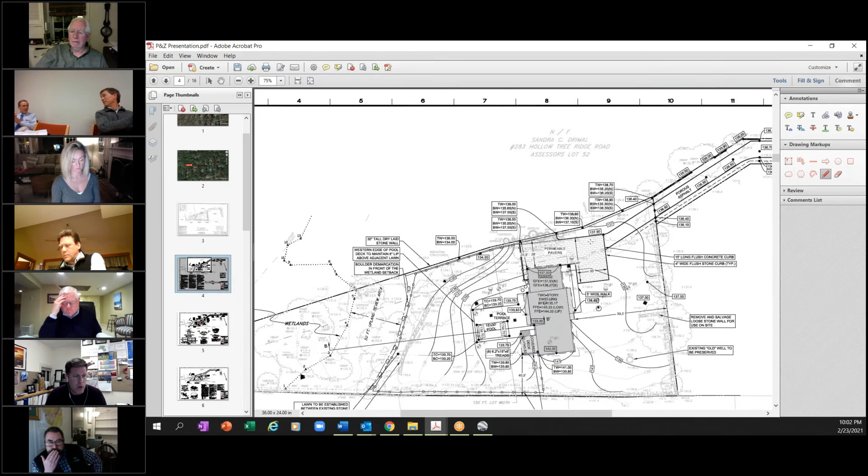So largely we're here because this is an excavation and filling application. We are bringing in more than the typical 50 cubic yards of fill onto the site. That is to basically provide some elevation to do the stormwater management, so we can keep the stormwater management devices above groundwater, so they'll continue to work in times of seasonal high groundwater. And it is also to keep the lower sections of the foundation above that groundwater level as well.

Again, I described how the property generally slopes from south to north. So water goes in this direction towards the wetland and the watercourse. All right, cleaning it up a little bit. We are proposing a freestanding 30-inch tall dry laid stone wall on the northerly property boundary.

Where the drive court abuts that wall, instead of a freestanding wall, it'll be a retaining wall. It'll still maintain its 30-inch height as viewed from this property to the north, but it'll retain about 2 feet of soil that kind of holds up the drive court and allows the drive court to be level as it gets into the garage. So that's the grading we had within 15 feet of the property boundary.

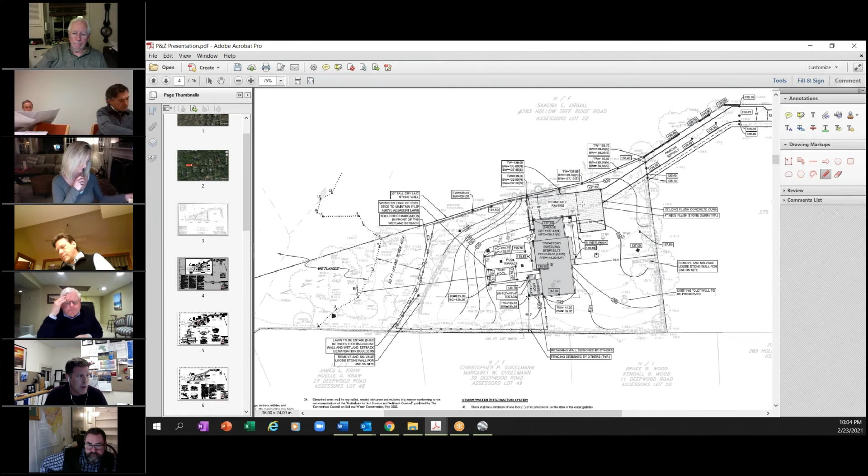Because our property slopes from south to north, there is no impact on the adjacent property. We're not preventing their water flow at all. We believe we fully comply with Section 850 and your standards of decision under Section 853. That is my presentation. I'm happy to take any questions. Thank you, sir. Appreciate that. Always thorough as expected.

Okay, I have one question, I can hold it to the end. Let me ask you this. With regards to Darren Astafine's memo, you're okay with all that stuff? Yeah. So he provided an email. His email to me was dated February 8th. Got it. At 5:18 p.m. I responded to him on February 8th at 6:14 p.m. with our specific answers to all of his comments.

I talked to Darren on February 9th, Tuesday, and he said he's good. He doesn't have any further comments after reading my comments, and I related that in an email to Jeremy on Tuesday, February 9th at 1:32 p.m. Perfect. Thank you, sir. Any commissioner comments on this application at this point? Go ahead, Kara. No comment.

Only I'm looking at the paper package we got. So this is just for Fred and Jeremy, not for you, Craig, because I'm sure it's probably online. Is his response to Doug's February 8th online, or did we get those emailed? I just had the February 8th ones, I think. We have Craig's February 8th, 6:14 p.m. email. Yeah, that was in your packet.

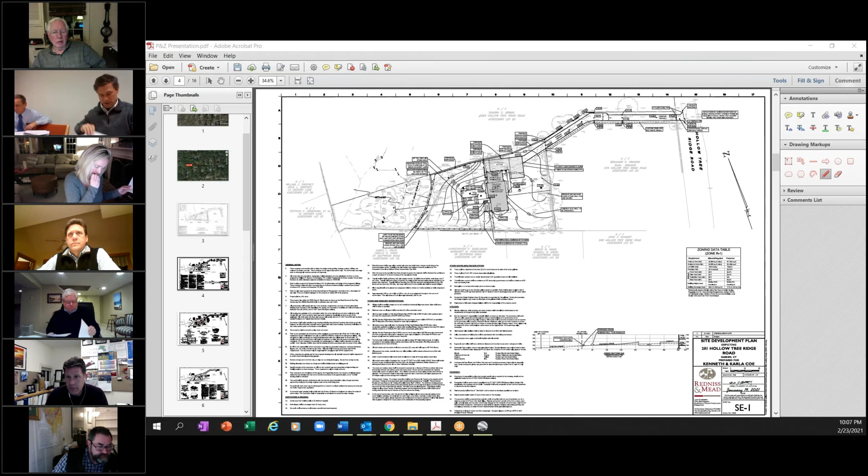Nope. Okay. Then the last question I have for you, Craig, is I guess there's a woman that lives a block and a half away. She sent you an email. Is she satisfied at the end of the day yet? Yeah. So Jeremy alerted me to an email he received from a Mrs. Joyce. And Mrs. Joyce lives kind of right here. So the north side of her property is along that watercourse that leaves our property.

And I responded to her email, letting her know that there would be no increase in stormwater runoff to that watercourse, and that we had studied it very carefully. We actually included in our drainage analysis a complete study of the 37-acre watershed that's tributary to that watercourse, to make sure that we weren't having an impact there. Okay. They're not an abutting property, right? It's not even on the corner. It's off the corner. Yeah.

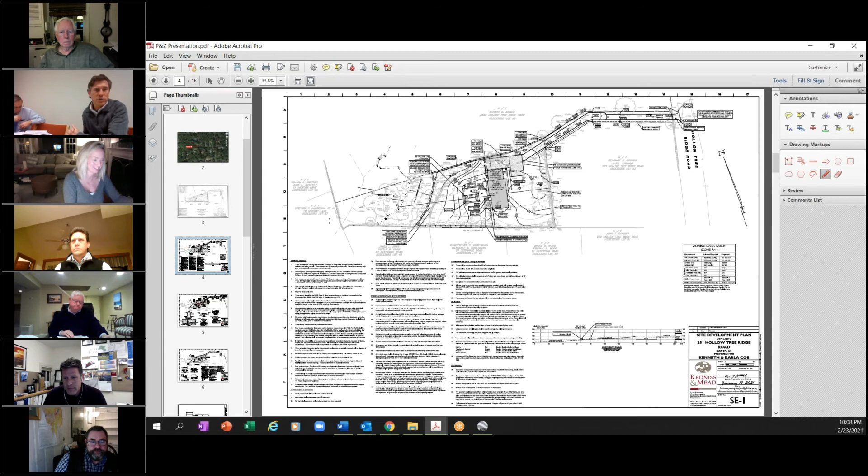But so it's still above and beyond the applicant. Well, it's downstream. It's downstream, Kara. That's why it matters a little bit. Exactly, but I think it's better that even though they're on abutting, that it was the right... Yeah, absolutely. Okay. I think all the commissioners are fine.

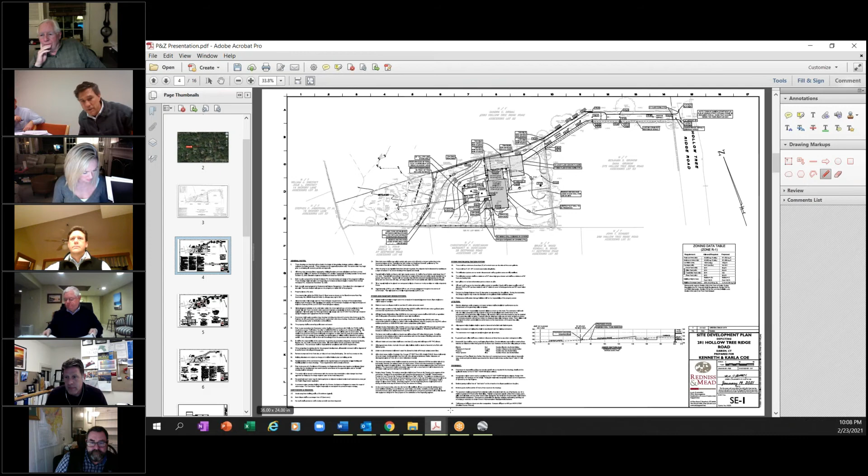Is there anyone from the general public who would like to speak to this application? Fred, you can alert me if anybody says yes. Just for the record, I'm really tired of this Zoom stuff. It's killing me. No one, Steve. All right, thank you. With that said, I'd entertain a motion to close.

It's Jim Rand, a second from Kara Gately. All right, Craig, good job. All right, have a good night. Next week. Time for dinner. Get back to you. I'm starving, by the way.

All right, I think that's the end of the public hearing? Yep, general meeting. We are done with the public hearing. We're going to switch into the general meeting. Okay. I think we have all 6 commissioners, right? First time in a while. Good, great. Jennifer Leahy, you back? Jennifer's mic is on. Yeah, I'm here. Thank you, Jen.

Special permit application number 317, ELD Street Properties LLC, 1049 Boston Post Road. This is the Compass Real Estate Office that wants to go into the Tina Dragon store. We heard this hearing on, wow, January 5th. So was that a month and a half ago? I think we deliberated once with just 4 commissioners live, and we didn't want to move forward till we had all 6 in the same spot. So we're going to try to finish our deliberations tonight and see where we go.

I don't really remember. I remember who spoke and what everybody said. There were 2 people at one point in time kind of sort of for it, 2 people at one time kind of sort of not for it. So that's why we waited till everybody was here. I'm waiting for more information. I get it. We're going to start from scratch anyway.